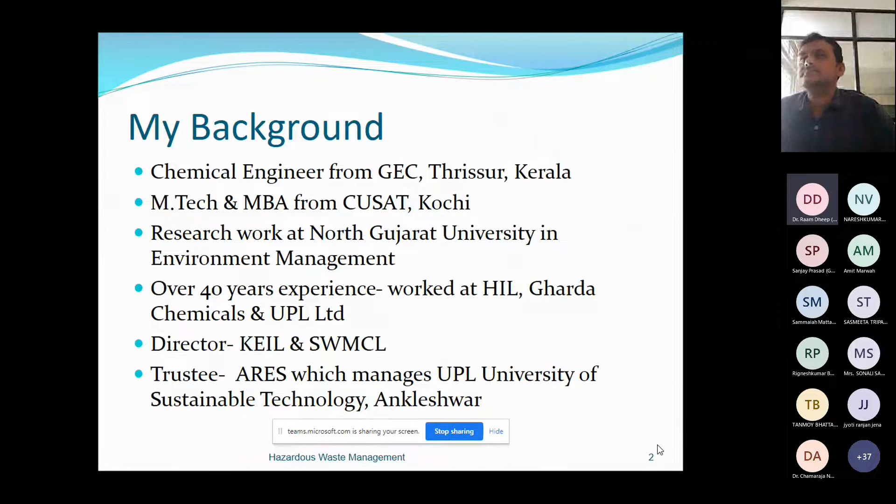I will go to the full slide. So this is already my background explained - I am also a chemical engineer, so very happy to associate with the Indian Institute of Chemical Engineers and this department.

This presentation covers the introduction to the waste management concept, why this is very important, and developments related to the Basel Convention - an international convention. Then the Hazardous and Other Waste Management and Transboundary Movement Rules, 2016, which are the latest amended rules. Then other guidelines and standards for segregation, storage, transportation, treatment and disposal - this is important because we're talking about waste technology. Ultimately, co-processing is utilization, incineration is thermal destruction, and secured landfilling is the final disposal. Last is a case study, and most of the detailed portion will be on the case study.

The European Union has come up with stringent norms for hazardous waste management. The rules are very strict and norms are very difficult to comply with, which is why the focus is shifting to preventing waste generation and utilization. The disposal norms and standards are very, very strict.

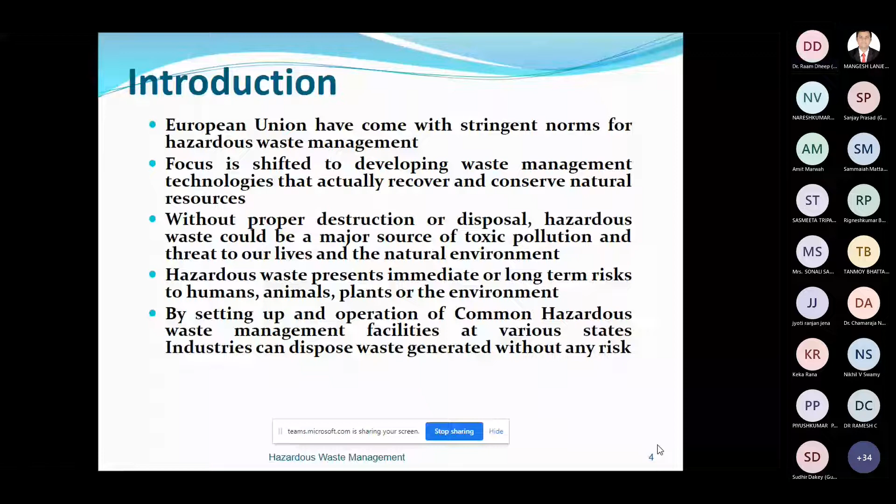Once a site is suspected of having contamination, detailed studies are needed. One of the basic reasons for taking care of proper management of waste is to avoid contamination to the land, water, and air. So once a site is suspected having contamination, you have to do detailed studies.

A contaminated site is a site with a confirmed presence of dangerous substances. Many people say contaminated site, but you need an assessment, and then you have to confirm there is a presence of such dangerous or toxic substances.

The Love Canal incident in USA forced the government to enact CERCLA, or the Superfund Act, in 1980, because in USA it's a major fund, the Superfund, to clean up or remediate contaminated sites. This cleanup or remediation act was enacted in 1980. The European Union also has guidelines for addressing environmental contamination.

There are several sites across the world contaminated because of old practices. Many of them have already been remediated or brought back to original state, or there are a lot of remediation activities going on. This is one of the major activities of environmental professionals today in developed countries, because old practices have given a lot of problems. Today, luckily in India, we don't have that much problem, because our industrialization started very late.

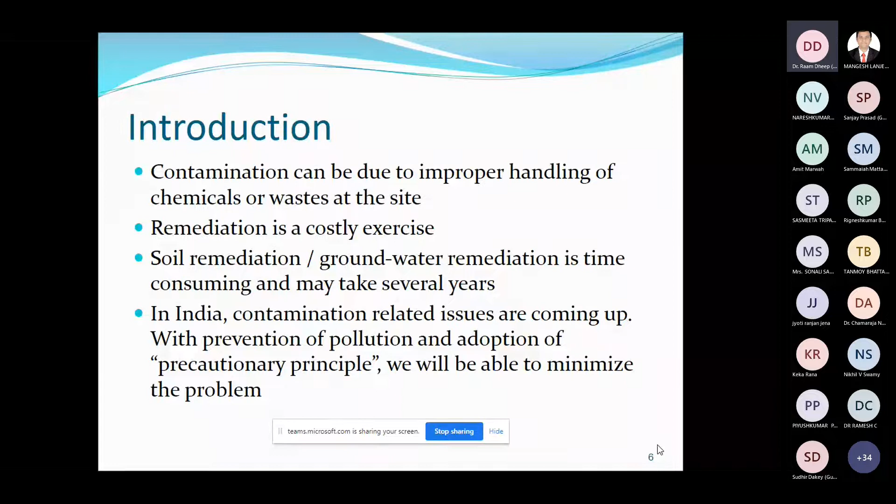Since this is a 2 hour session on the subject, I have taken some examples so that we will come to the subject gradually.

So Superfund, I told you there is a Superfund Act and everything. The Federal Superfund Program, administered by the US Environmental Protection Agency (EPA), is designed to investigate and clean up sites contaminated with hazardous substances.

Sites managed under this program are referred to as Superfund sites. It's a national listing. There are 40,000 federal Superfund sites across the country in USA, and approximately 1,600 of those sites have been listed on the National Priorities List because of the severity of the contamination problem.

So they are included in the National Priorities List, which are being addressed initially. Sites on the NPL are considered the most highly contaminated and undergo longer term remediation, with ongoing cleanup.

So another incident, Koko, Nigeria. There is an incident in 1988. Italian businessmen illegally dumped over 2,000 drums, sacks and containers full of hazardous waste in a small fishing village in southern Nigeria. About 2,000 drums containing hazardous waste were dumped in Nigeria by an Italian businessman.

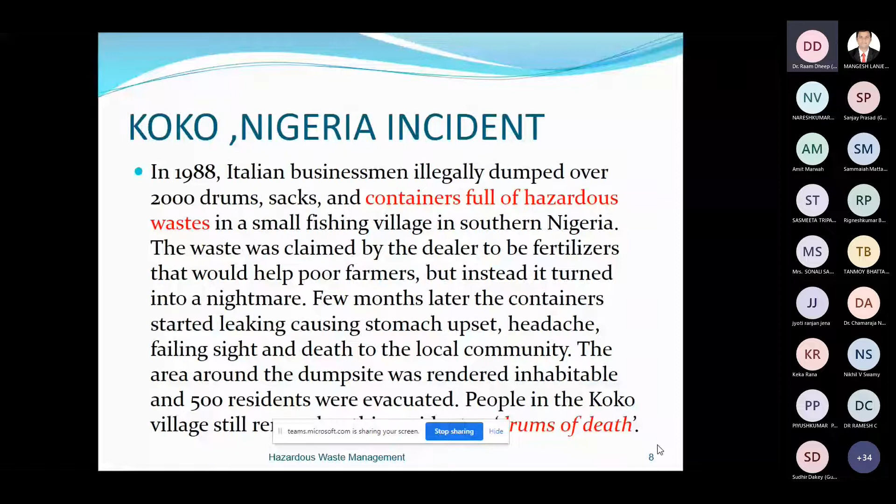Another one, not very old, is the Ivory Coast toxic waste dump. Most of you must have read about this one. This happened around 2006. The 2006 Ivory Coast toxic waste dump was a health crisis in Ivory Coast, in which a ship registered in Panama was involved. Here too, a lot of countries are involved, which is why the Basel Convention came about.

The ship, Probo Koala, chartered by the Singaporean-based oil and commodity shipping company Trafigura Beheer, offloaded toxic waste to an Ivorian waste handling company, which disposed of it at the port of Abidjan.

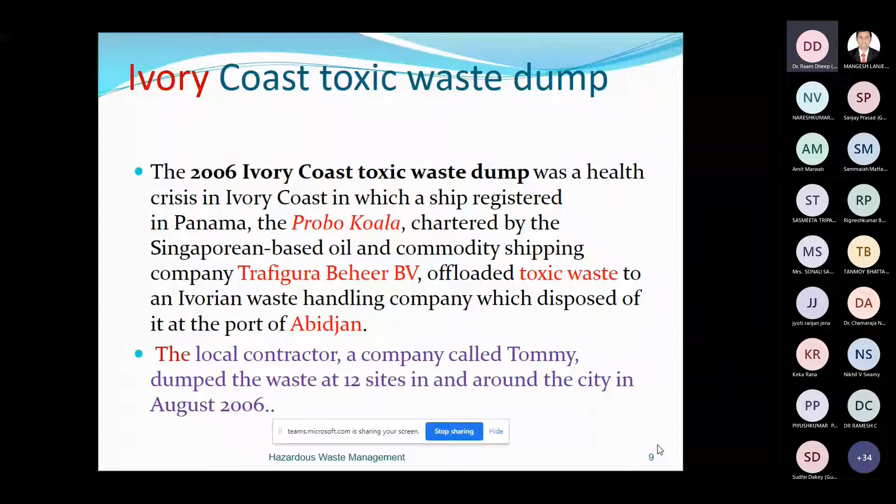In all these activities, several people are involved, especially a local person, local company or local agency who makes a lot of money. The beneficiaries are the generator, the transporter, and the dumper. The local contractor, a company called Tommy, dumped the waste at 12 sites in and around the city in August 2006. He accepted it and managed the material by dumping it everywhere.

The dumping took place against a backdrop of instability in Abidjan, as a result of the country's first civil war. It allegedly led to the death of 17 people directly, and injury to more than 30,000 people. This particular incident got a lot of attention in 2006, because 17 people died and 30,000 people is a very large number of people affected.

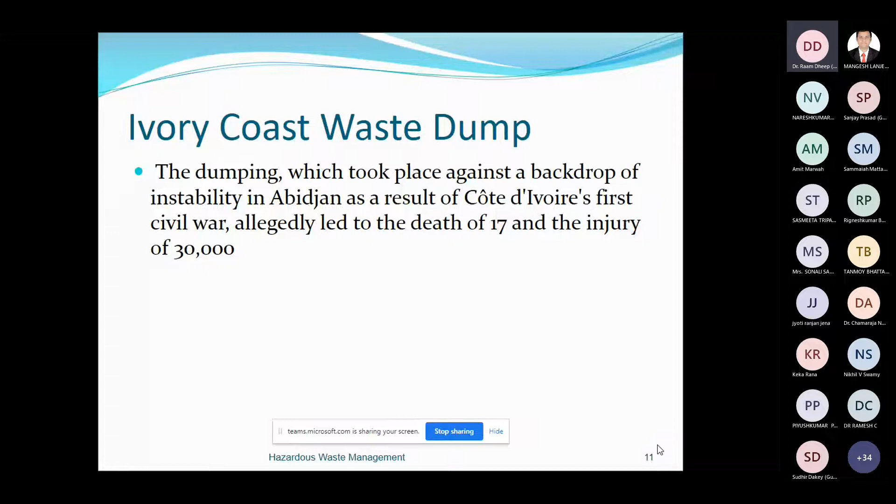Trafigura originally planned to dispose of the slops, which resulted from cleaning the vessel and contained 500 tons of a mixture of fuel, caustic soda, and hydrogen sulfide, at the port of Amsterdam. The company refused to pay the Dutch company Amsterdam Port Services (APS) for disposal after APS raised its charge from 27 euros to 1000 euros per cubic meter.

There was a facility for treating the waste at Amsterdam, and they were ready to treat it. Originally the agreed rate was only 27 euros, but finally when it came to it, Amsterdam Port Services said they wanted 1000 euros per cubic meter. It was a very high increase and the cost was very high.

The Probo Koala was reportedly turned away by several countries before offloading the toxic waste at the port of Abidjan. The ship was traveling with the waste, looking for an opportunity, because it was under the radar. It had already gone and moved around, and finally in Ivory Coast, somebody accepted money and did this wrong thing.

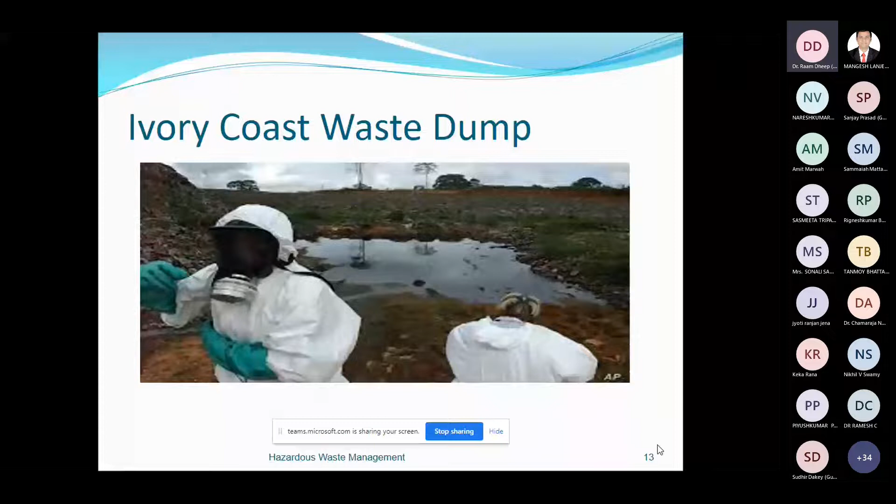Shortly after, it became apparent that the toxic slops from the Probo Koala had led to an outbreak of sickness. People started having problems.

Two executives, Claude Dauphin and Jean-Pierre Valentini, traveled to Abidjan. They were arrested on 18th September, 4 days after their arrival, and were held in Abidjan's prison, charged with breaking the country's laws against poisoning. So these people were arrested.

The head of the Ivorian contractor who dumped more than 500 tons of toxic waste was sentenced to 20 years in prison in November 2008. It took some time to develop. On 13th February 2007, Trafigura agreed to pay the Ivorian government 100 million pounds for the cleanup of the site.

So, cost you see, they have agreed to pay. Then on 16th November 2012, Trafigura and the Dutch authorities agreed for a settlement. So finally, because different countries are involved, Dutch authorities are involved, the Ivorian people are involved, they have come to an agreement.

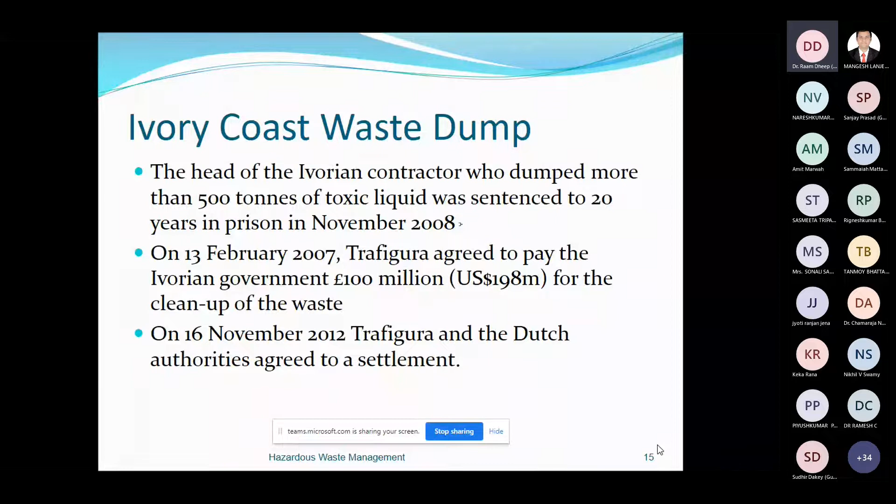The settlement obliges Trafigura to pay the existing 1 million euro fine. And in addition, the company must also pay Dutch authorities a further 300,000 euros in compensation, the money saved by dumping the toxic waste in Abidjan rather than having it properly disposed of in the Netherlands.

So you see, the authorities have taken strict steps, caught the people, fined them, imprisoned them. They also have a heavy penalty, 1 million euro for the cleanup and everything, and I think 3 lakh euros for compensation. So all these are very risky and high. This is a very big lesson. So all this led to the Basel Convention.

One of the incidents which led to the creation of the Basel Convention was the Khian Sea waste disposal incident, in which a ship carrying incinerator ash from the city of Philadelphia in the United States dumped half of its load on a beach in Haiti before being forced away.

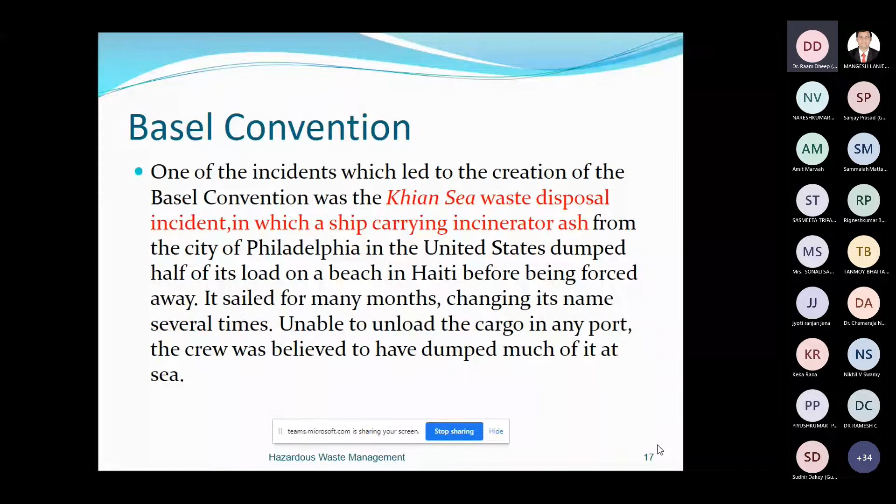It sailed for many months, changing its name several times. Once you are under the radar, you can't escape easily. So just like the nameplates are changed on a car by robbers, they changed its name several times. Unable to unload the cargo in any port, the crew was believed to have dumped much of it at sea. That is one of the lessons from this.

The Basel Convention on the control of transboundary movements of hazardous wastes and their disposal is the most comprehensive global environmental treaty on hazardous and other wastes. It was opened for signature on 22nd March 1989 and entered into force on 5th May 1992.

Because of the issues countries were facing, especially developed countries generating huge quantities of waste, they were dumping rather than treating and disposing, simply sending it to underdeveloped countries. To prevent that transboundary movement from one country to another, the Basel Convention was brought, and it came into force on 5th May 1992.

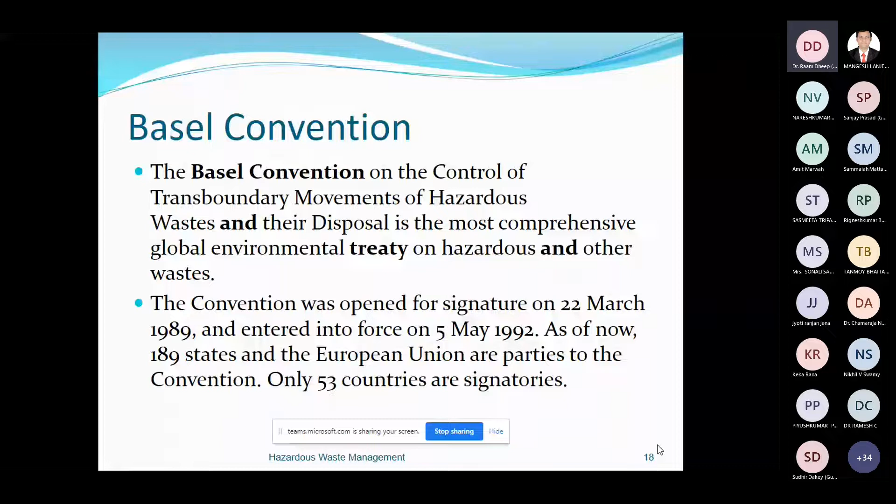As of now, 189 states and the European Union are parties to the convention. Only 53 countries are signatories, and many countries have already implemented it. For our hazardous waste rules, in 1989 we made the first rule, then we adopted the Basel Convention, and we have updated our rules and regulations to match it.

Under the Basel Convention, a waste falls under the scope of the convention if it is within the category of waste listed in Annex 1 of the convention and it exhibits one of the hazardous characteristics. In other words, it must both be listed and possess a characteristic such as being explosive, flammable, toxic, or corrosive.

The other way a waste may fall under the scope of the convention is if it is defined or considered to be a hazardous waste under the laws of either the exporting country, the importing country, or any of the countries of transit. So if by a country's regulation it is a hazardous waste, then it is a hazardous waste. Basel has a lot of provisions; I am not going into the detail.

Now let us come to our regulations, the Indian regulations. All of you know the Environment Protection Act 1986. A lot of discussions are there. You also must have discussed it, because in many seminars and workshops the Bhopal tragedy is discussed. It is in our memory.

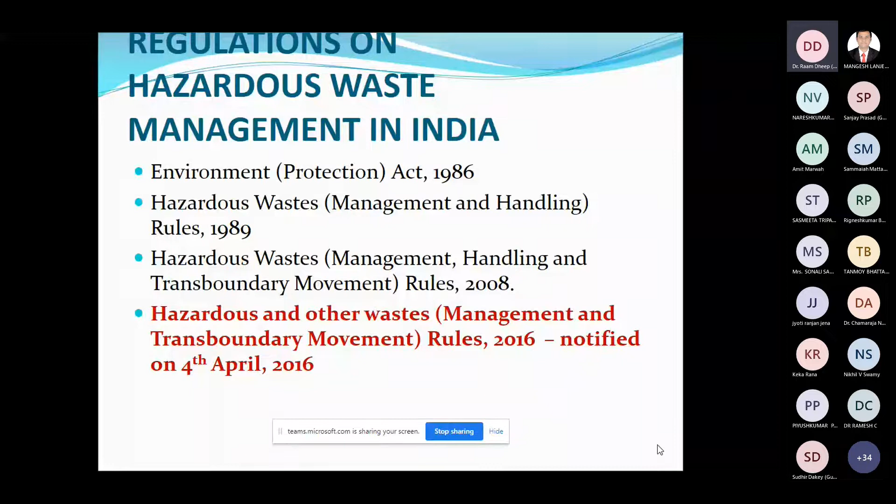Salient features: the rules 2016 shall apply to the management of hazardous and other waste as specified in the schedules of these rules. It shall not apply to wastewater and exhaust gases, operations from ships beyond 5 kilometers, radioactive waste, biomedical waste, domestic waste, because there are separate rules for the other waste handling. So this is exclusion. For biomedical waste there is a separate rule, the biomedical waste rules. So many rules are there.

For example, in 2016, there are 6 rules that have been notified: biomedical waste, hazardous waste rules, municipal solid waste rules, construction and demolition waste, e-waste rules, and plastic waste also. So all 6 waste management rules have been modified and notified. In 2016, a lot of modification and updation has taken place.

The structure of this hazardous waste rule is a total of 6 chapters, 8 schedules and 12 forms. Chapter 1 deals with the applicability and important definitions. Chapter 2 deals with the provisions of waste management with respect to responsibilities of various stakeholders. Chapter 3 deals with the provisions of import and export.

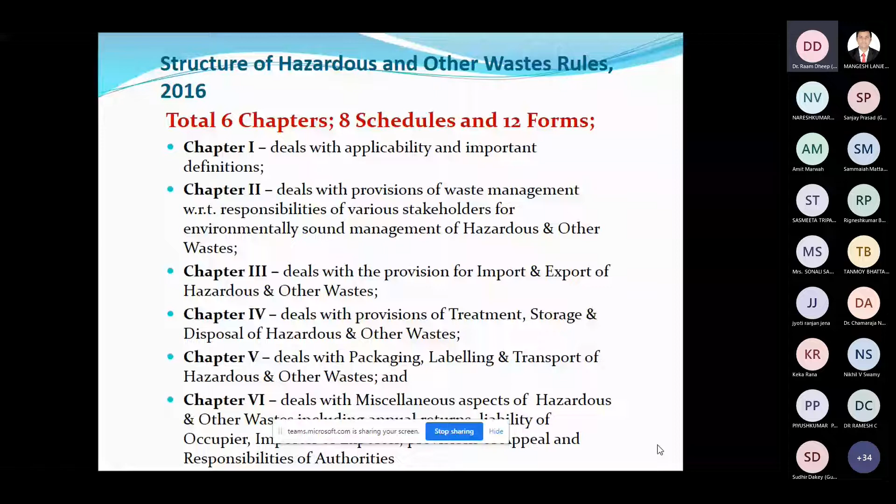Chapter 4 deals with the provisions of treatment, storage and disposal of hazardous and other waste. So here they have given the basic requirements in chapter 4. Chapter 5 deals with the packaging, labeling and transport of hazardous and other waste. Chapter 6 has the different miscellaneous provisions.

Schedule 1 is the list of processes generating hazardous waste. What is happening in schedule 1? They have given 38 processes, each process generating various hazardous waste streams with the category number. I will give an example later from the pharmaceutical sector of the category number and everything.

So each industrial sector has a number, and there may be 5 or 6 categories listed. These are called listed waste. If it is coming, for example, as solvent waste from a pesticide industry, it may have a number like 29.3. Then it is a hazardous waste.

Then schedule 2 is the list of waste constituents with the concentration limits. Schedule 2 covers any waste having some toxic materials concentration exceeding the prescribed limit. For example, if it has hexavalent chromium above, say, 5 milligram per kg or something like that, then it becomes a hazardous waste. So it is based on the concentration, and there is a procedure for that.

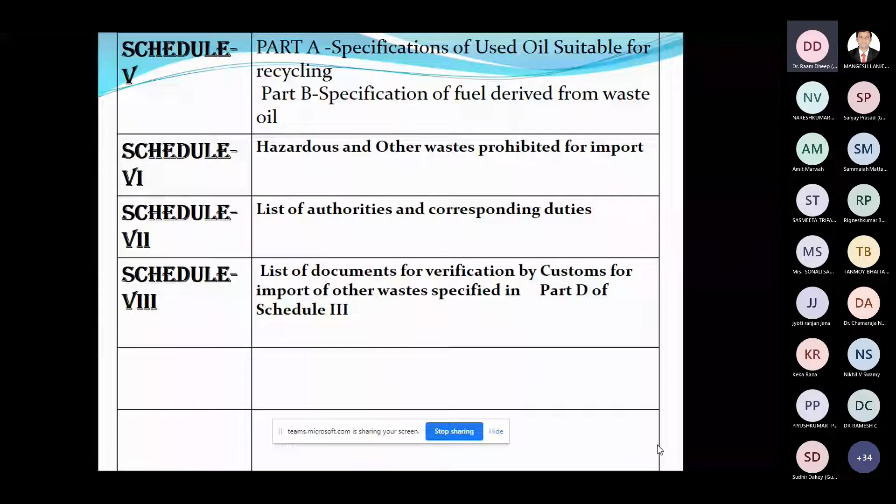Then schedule 6, prohibited materials for import. Then the list of authorities and corresponding duties. Then the list of documents for verification by customs, because import and export is happening. If there are still certain things they are allowing to import, it is for that only. Forms: form number 1 is the application required for grant or renewal of authorization.

So even if you do co-processing or recovery or everything, you need an authorization. So for that, form number 1 is given. Form 2 is the form in which the Pollution Control Board gives authorization. That is form number 2. So they will have to give the details.

Form 3 is a format for maintaining records of hazardous and other waste. There is a format for maintaining how much opening stock is there, how much is generated, how much you treated, and how much you disposed of, and all this needs to come, and what is the closing stock. Form number 4 is the format for annual returns. You have to give the details in form number 4.

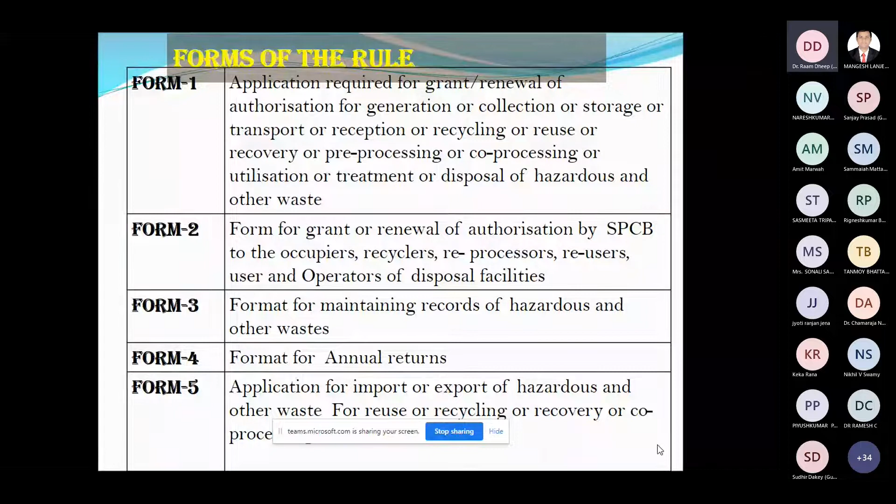Form number 5 is the application for import or export. Certain things are allowed for import or export, and this form is for that particular thing. So I will go through some of the definitions.

So very important, waste means materials that are not products or byproducts. So it is very important. It's not products or byproducts for which the generator has no further use for the purpose of production, transformation, or consumption. So waste is something which is coming ultimately.

Waste includes the materials that may be generated during the extraction of raw materials, the processing of raw materials into intermediates and final products, the consumption of final products, and through other human activities, and excludes residuals recycled or reused at the place of generation. So what is remaining only is the waste as per the waste definition.

Byproduct means a material that is not intended to be produced but gets produced in the production process of the intended product and is used as such. In many manufacturing processes, we use different raw materials and we intend to get an X product, but along with that, you get Y and Z byproducts like HCl, H2S, or many other things. So in the reactions in chemistry, you get something which is not required by us, but it comes along with the chemistry.

So those are byproducts. This is the first time byproduct has been defined in the rule. Earlier it was not there. So this rule has brought it, and definitely this has brought a lot of confusion into the industry and the authority.

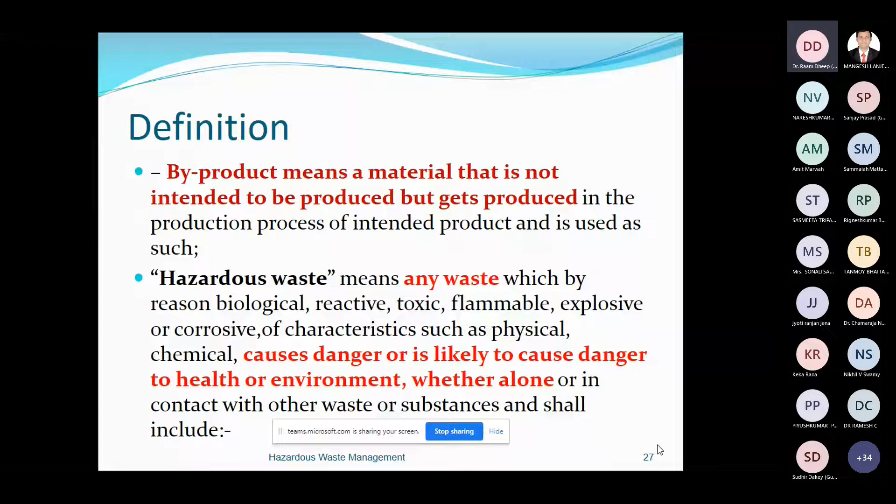Hazardous waste means any waste which by reason of characteristics such as physical, chemical, biological, reactive, toxic, flammable, explosive, or corrosive causes danger or is likely to cause danger to health or environment, whether alone or in contact with other waste or substances, and shall include waste specified in Schedule 1. I told you Schedule 1 has 38 processes. Waste in Schedule 2 with the concentration limits. And then waste specified in Part A, Schedule 3 in respect of import or export. So if it is included, then as per the rule, it is classified as a hazardous waste.

Another important definition is co-processing. Most of you must have heard of it nowadays. It means the use of waste materials in manufacturing processes for the purpose of energy or resource recovery. Both are possible. Energy recovery, resource recovery, and resultant reduction in the use of conventional fuels or raw materials through substitution. So co-processing is practiced by several cement industries, several steel industries. This has attained very big attention in the last decade and is going on in a big way. I will give some examples also.

Other waste means waste specified in Part B and Part D of Schedule 3 for import or export. So it is especially for import or export. It is specifically defined, and it is also generated in India.

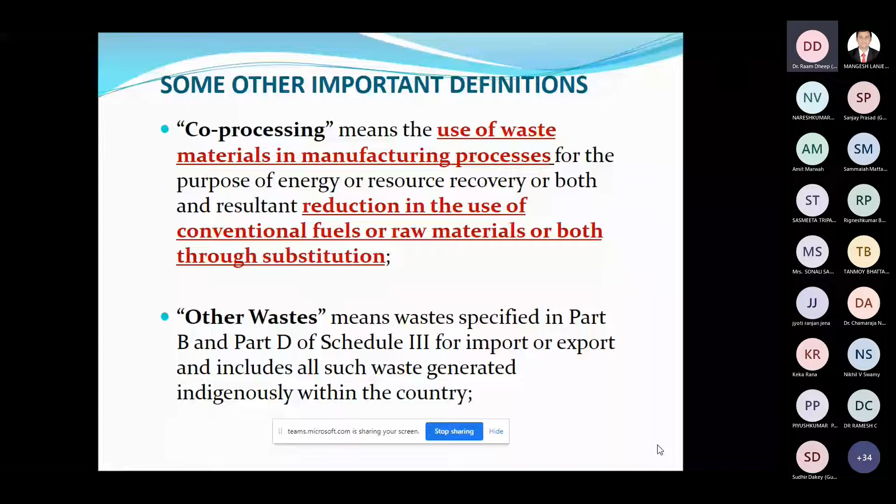So as an example of the categorization as per the rule, if any industry is generating ETP sludge, the category is called 35.3. So this is a listed waste. ETP sludge is a listed waste with category number 35.3. Used oil is 5.1. It can be given to registered recyclers. Drums, contaminated containers and all are 33.1. These can be given for decontamination, detoxification, and to approved scrap processors.

Process distillation residue from a pesticide plant is called 29.1. It is to be incinerated. Like that, there are different categories like batteries A5, asbestos B21, off-specification products from a pharmaceutical company come at 28.4, incineration. Similarly, date-expired or off-specification product from a pesticide plant comes with 29.3. So this gives a very clear-cut category of manufacturing or processing and the waste category. I think about 128 categories are listed there, and this number definitely identifies the material.

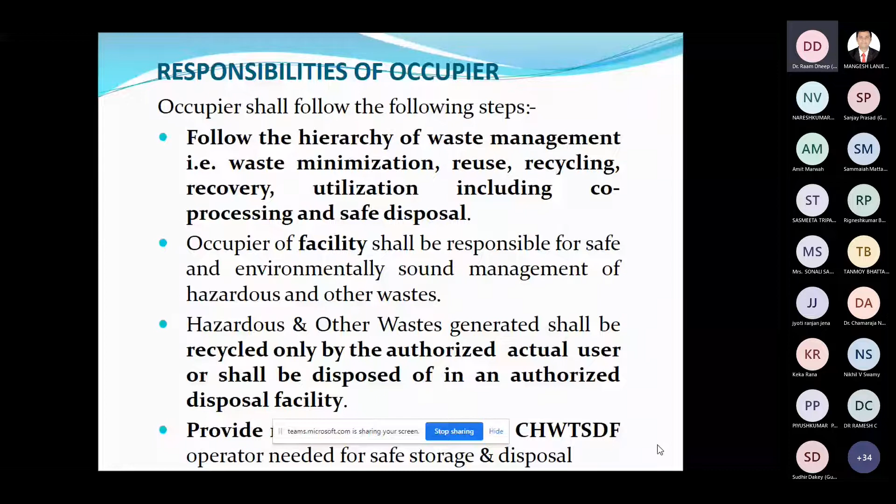Similarly, the Ministry of Environment, Forest and Climate Change is the nodal agency to deal with the transboundary movement of hazardous and other waste. They have to do identification of the waste, grant permission for import and export. They promote environmentally sound management of hazardous and other waste. Also, they sponsor various training programs, awareness programs, and everything is the responsibility of the Ministry of Environment and Forest.

The Central Pollution Control Board is the coordinator of activities of the State Pollution Control Boards. They conduct various capacity building programs, just like this program, for the State Pollution Control Boards and the industry people. And they prepare various standards and specifications.

Even today, I will show the recycling of various process wastes. They have to prepare standard operating procedures, so that many such waste streams can be converted into useful products or can be used. So those are their responsibilities.

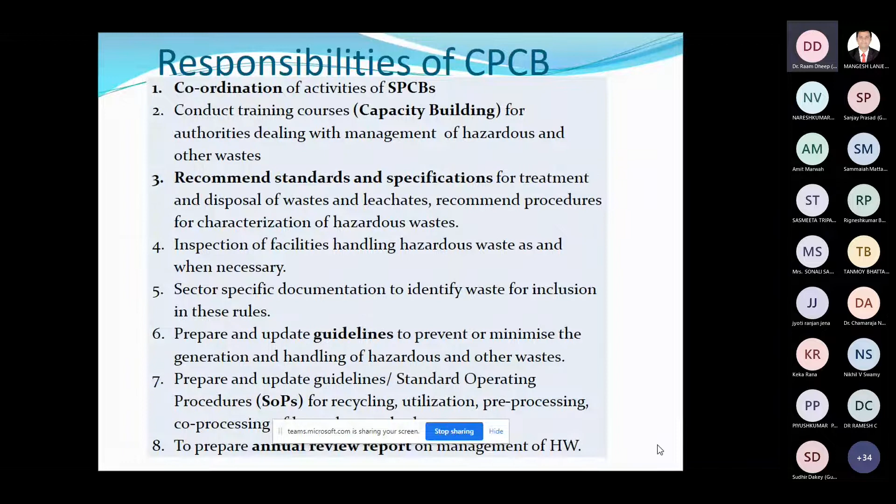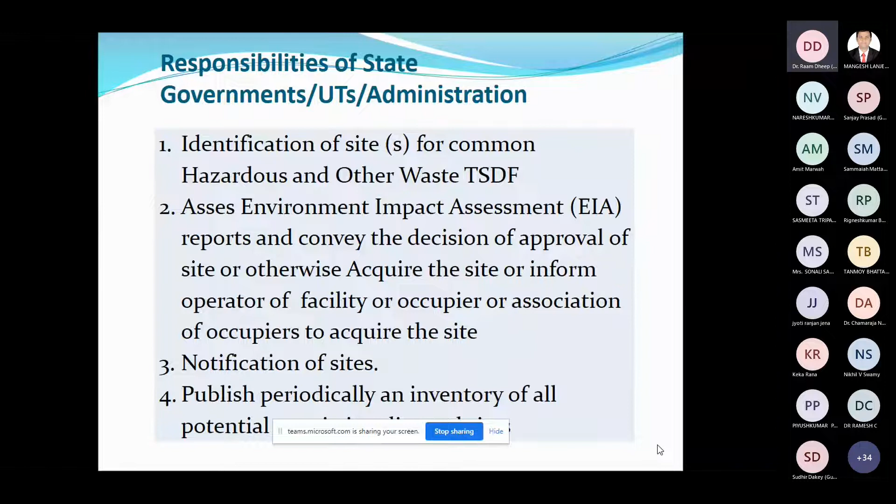The State has to identify the sites and facilitate the EIA, environmental impact assessment. The major responsibility is notification of the sites, and also they have to publish the inventory of hazardous waste generation in the state. The State Pollution Control Board has to do the inventorization, how much is there, and they have the responsibility to grant and renew the authorization. The industries handling hazardous waste in any way need to have an authorization under this rule, and that is given by the State Pollution Control Board.

Then they have to monitor the compliances. Then action has to be taken against the violators. Implementation of programs to prevent, reduce or minimize the generation is also their responsibility. They have a lot to monitor.

The Directorate General of Foreign Trade and Port Authority, because this is applicable basically for the import and export. They have to verify the documents and grant the license required. So all these come there.

If you see, earlier, say 25 years back, our ports like JNPT port had huge quantities, thousands of tons of waste material lying. There were no owners. Somebody imported it and it was lying there, and there were cleanup activities. There was a Supreme Court appointed high power committee looking into this. That is why a lot of focus has been given to prevent import of the material.

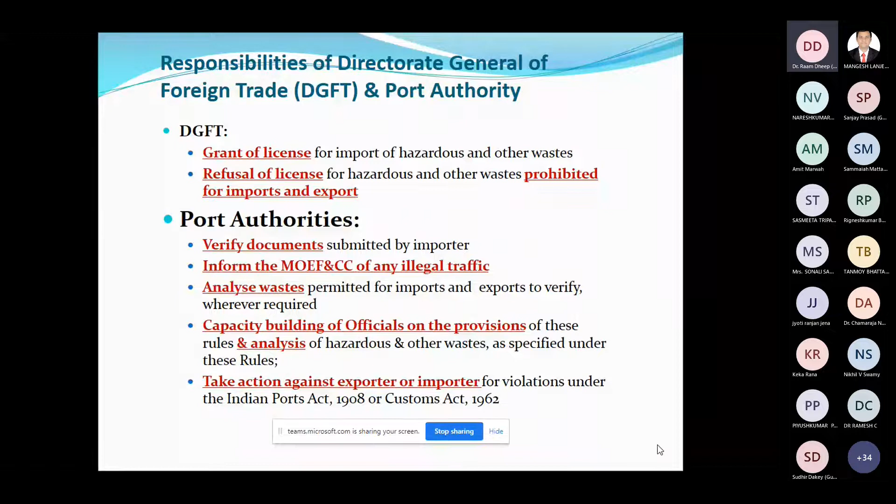Actual users' responsibility is to obtain authorization, then maintain records. If you are utilizing the waste for any purpose, you have to maintain a passbook for the record that is issued by the Pollution Control Board along with the authorization. Maintain records of waste handling: how much you have received, how much you processed, and how much you have sold. And also you have to ensure compliance with the standards.

Importers have to obtain the proper license and follow the proper procedure. Then obtain EPR, extended producer responsibility, which is very important for certain items like electrical items. They have to maintain records in Form 3, obtain authorization, and file an annual return.

So all importers will have to do this. Then there is packaging and labeling in the rule. Any hazardous waste container needs to have proper labeling, so that people take care. It should not be transported along with any food items or edible items. Earlier, such incidents have happened.

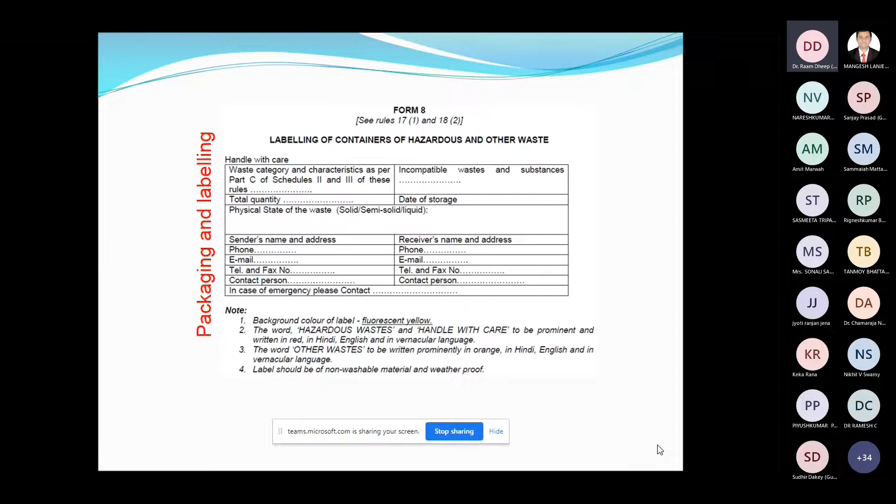So even chemicals you can see in our area, in many of the industrial estates, lying. So people sit on that one, and contamination chances are there. It needs to be taken care of very much. A lot of labeling, identification. Even in the industries, what is happening? Even in the industries there are issues: waste versus raw materials or products without proper labeling.

Another important document is the manifest system. The manifest system is a movement document for hazardous and other waste to be used within the country. The sender of waste shall prepare 7 copies of the manifest in Form number 10, comprising color codes, and the 7 copies shall be signed by the sender. So this is a tracking system.

The sender has to fill this one, and this is helping in the transportation and in tracking the total transportation. And today other requirements have also come. All the transportation vehicles should have a GPS system. Only GPS-mounted vehicles can be used for the transportation. But the manifest system is one thing universally being used.

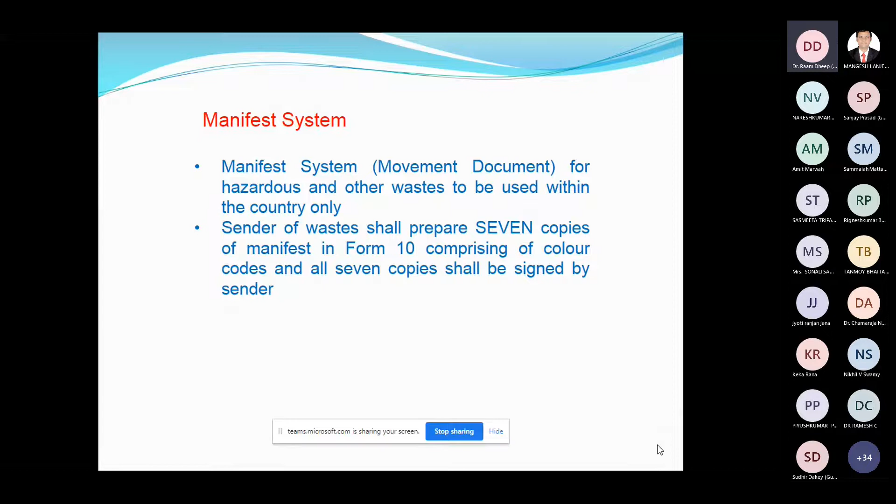So this is the format where people fill in the date, and different color codes are there. All details are there, and this is given to the transporter with his signature, and then it goes to the disposal facility or the receiver, and he receives it, stamps it and returns it. And finally, this copy is sent to the Pollution Control Board.

So these are different colors, and there are 7 copies. The 7th copy is required only for interstate movement. Otherwise, 6 copies are used within the state. The 6 copies are there, and different colors are also there.

So now what has happened? The pollution control boards have started an online manifest system. So a real paper copy is not required. So that is also very easy. Online that facility is there. People fill it up and send it, and tracking is very easy. It can show where the vehicles are, and along with the GPS, it is very useful.

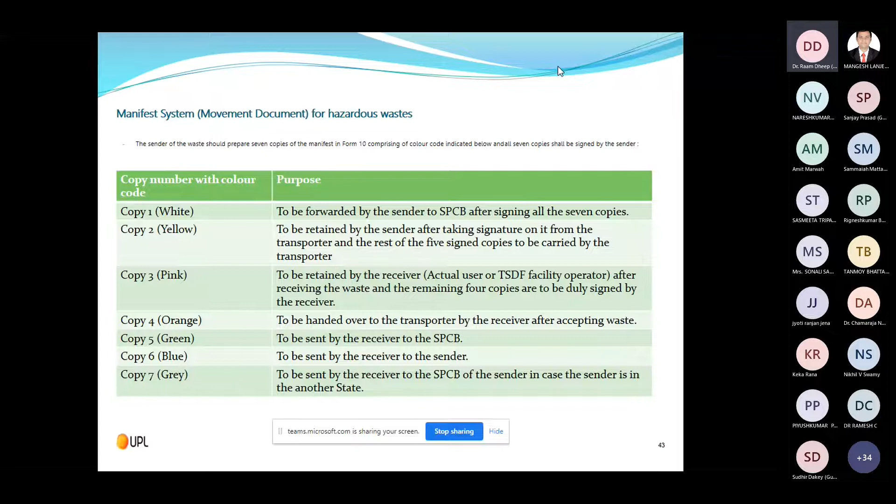So now we will go to another important area, utilization of hazardous waste under Hazardous Waste Rule 9. Utilization, people today say, technologically is an area that needs a lot of expertise and a lot of research work. Academic institutions can also take up such research projects, small projects, so that many waste streams can be converted into useful products you can recover. So rule number 9 is facilitating this.

The utilization of hazardous and other waste as a resource or after pre-processing, either for co-processing or any other use, including within the premises of the generator, if it is not part of the process, shall be carried out only after obtaining authorization from the SPCB. This is only in respect of waste on the basis of standard operating procedures or guidelines provided by the Central Pollution Control Board. So this is very important.

If you have a waste stream and you have found some utilization, then the generator or the people will have to work out and get the SOP, standard operating procedure, for that utilization prepared and submitted to the committees, and they publish this SOP. Only then will the State Pollution Control Board give the permission.

Whereas where standard operating procedures or guidelines are not available for a specific utilization, approval has to be sought from CPCB, which shall grant approval based on trial runs. So then they make the SOP. So if it is a first-time utilization, then a trial run or inspection visit happens, they look at the characteristics, and only then they give the permission.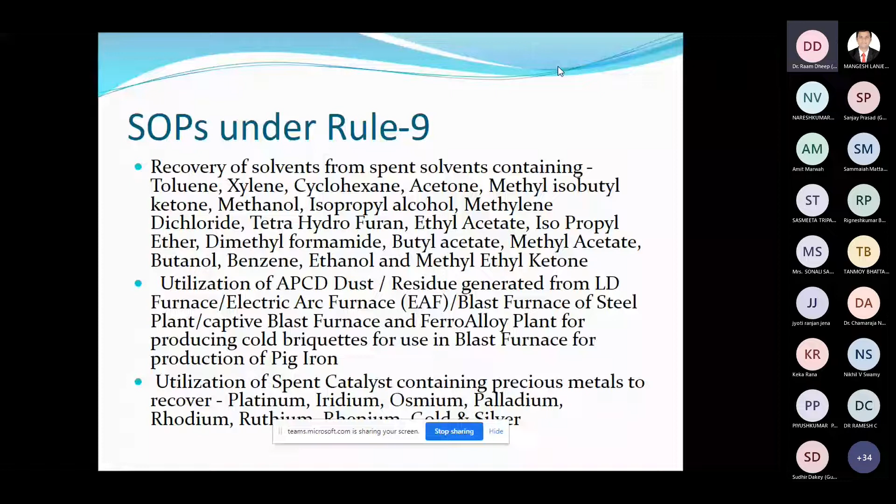Utilization of spent sulfuric acid generated from pickling operations for manufacturing ferrous sulfate. So this spent sulfuric acid from pickling operations, they take up and it can be converted into ferrous sulfate.

Utilization of spent acid containing molybdenum generated from filament industries for producing molybdenum dioxide by heating process. This is a specific process they have given, and they got the SOP.

Utilization of spent HCl generated from steel rolling mills for producing ferric chloride. So this is only for a specific process they have taken, because spent HCl will have some contamination and characteristics. So that SOP is specifically for that particular stream.

So each industry or generator will have to identify the requirement, and then they have to characterize and develop the process for that, and then develop their own SOP and take it up so that it will be approved and it will come as an SOP for that particular stream. If one industry develops it for a particular process, this can be used by other people also.

This is an example of utilization of ETP sludge from pulp and paper industry. It's a hazardous waste otherwise - chemical sludge of ETP, including sludge from secondary clarifier, for energy recovery in atmospheric fluidized bed combustion boiler. So this is a fuel replacement. Some sludge from ETP of a paper industry has calorific value.

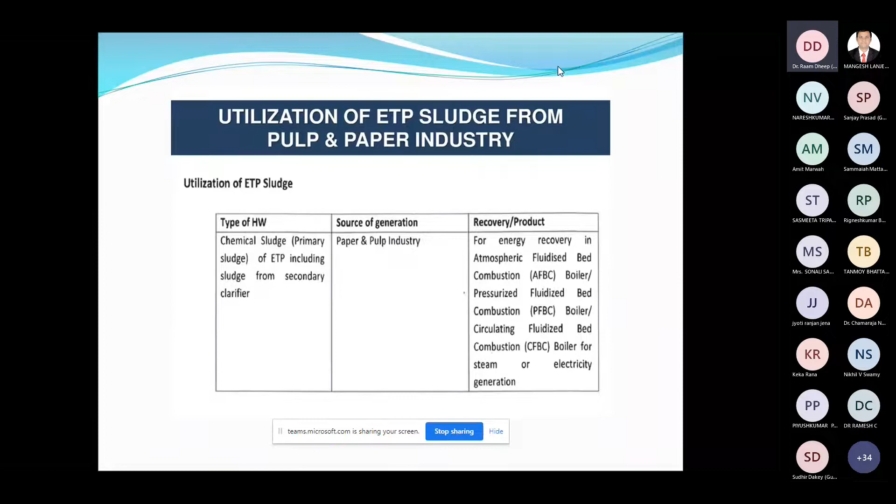So you dry it and use it as fuel. So there is an SOP already there for that particular pulp and paper industry. Similarly, there are 53 SOPs already published by Central Pollution Control Board. You can go through the CPCB website and understand. This case is one of the resource recovery options.

There is another SOP by CPCB for drum decontamination and reuse, because a large number of containers are generated in chemical industries and other industries. So there is an SOP for waste chemical, oil and lubricant drums or barrels - how to decontaminate, detoxify, and reuse them. If you follow that, authorization can be obtained, and people are already practicing this.

So that is on rule number 9. So for the implementation part, if you see, it is a very complex problem. It is not like wastewater treatment or air pollution. This hazardous waste is more complex, because different chemicals are involved. We don't know the characteristics in many ways, and so the technologies required are very complex.

And once you do something, you generate, you may change the waste form. For example, if you treat or incinerate, you generate ash, which is hazardous waste again, and you generate air pollution. So that air pollution you again scrub with caustic or other media, then you generate a scrub solution. That scrub solution you again treat with lime and others, you generate a solid waste. So it is a vicious circle. The problem is not solved everywhere, but by doing this step by step, the toxicity is reduced, hazardous nature is reduced, and the volume is reduced.

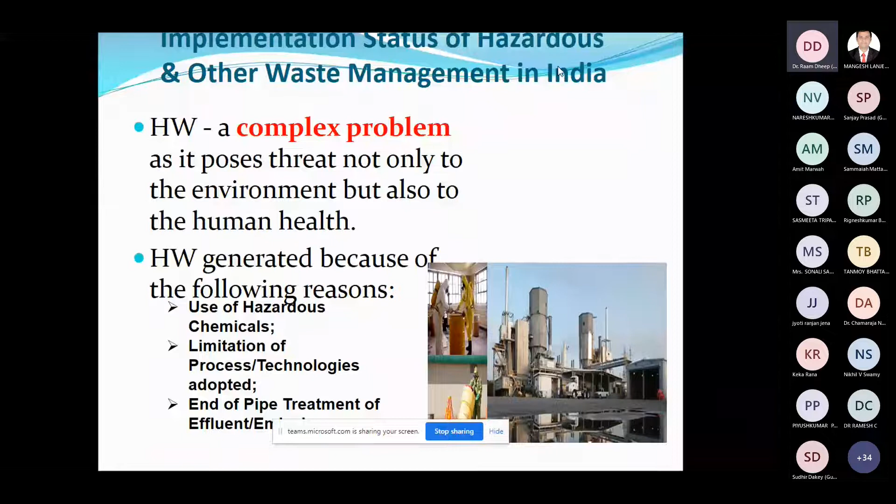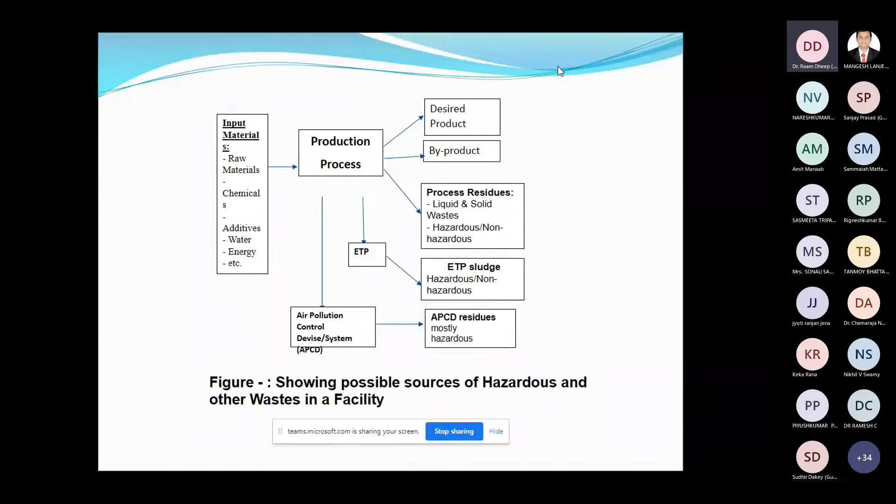So that is why waste management is very important. Different options are to be used, and different activities will have to be done. With your chemical industrial or chemical engineering background, you know the sources of generation from raw materials, solvents, and various additives to the chemical manufacturing process. You get the product, the byproducts, then different waste streams - solid waste or filtration residues. Effluent goes to the ETP, treated residues, air pollution control system - you get waste like that from different sources. You all know, so not going into detail.

Hazardous waste generation in India, as per CPCB, is about 7.2 million TPA, that is 72 lakh tons in a year. It is generated by about 60,000 industries. It is about 2 years old data, so I had taken it earlier from their site. It contains about 44% that is landfillable. So most of the inorganic waste can go to the landfill, as it is landfillable.

47% is recyclable, that is important. A lot of materials like gypsum and many other things are recyclable. Another 8.5% is incinerable, luckily small quantity, but 0.65, about 6.5 lakh ton, is a very huge quantity of incinerable waste.

About 83% of total hazardous waste is generated from 7 states: Gujarat, Maharashtra, Tamil Nadu, Andhra, West Bengal, and Chhattisgarh. So industrialized states, especially chemical industries and other metal processing industries, generate a lot of hazardous waste.

If you see the scenario today, I have seen the latest position. There are 29 common secured landfill facilities in the country, in 16 states, and there are 14 common incinerators. But some facilities have both landfill and common incinerator.

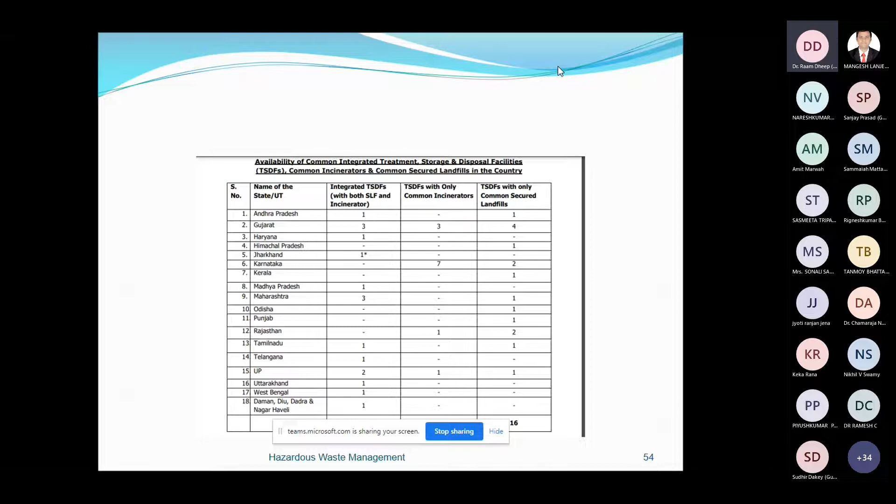And for hazardous waste, the basic important thing is the characteristics, which is very important. Ignitability: flash point less than 60 degrees, it can catch fire. Corrosivity: you know that pH less than 2 or above 12.5 attacks the metallic parts. Corrosivity is a big problem; if you keep it in containers, some of the things get corroded and come out.

Reactivity is another thing, a very dangerous property. Substances that are unstable under normal conditions can cause explosion, produce toxic fumes or vapors. For example, acid and alkali, if you mix them, there is a big reactivity. Similarly cyanide, sulfide, batteries - there are a lot of things which react together if mixed, and it gives a problem. So for people handling hazardous waste in common facilities, our headache is reactivity. It's very, very difficult to find out the reactivity, and it's a big problem.

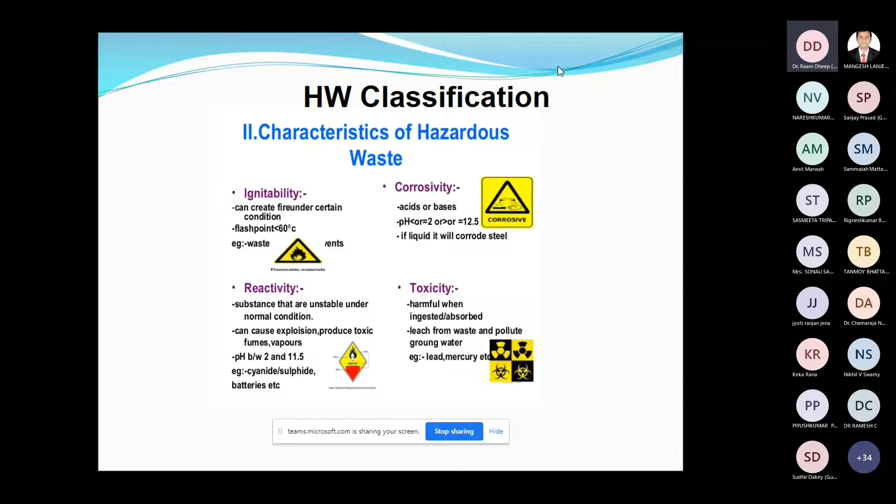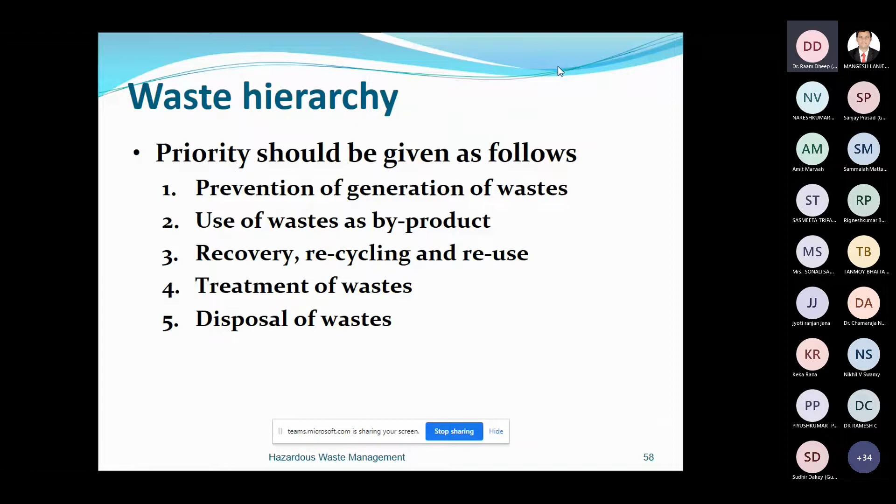Other activities like recycling, energy recovery is another thing - everyone is interested in energy now. So this is all important, but disposal is the last option, and the disposal quantity should be very minimum, after treatment and everything. And if possible, we should avoid it.

Waste minimization: process control, sound engineering practices, quality control, converting waste to useful products, reuse, recovery, process route change - all these are in our plan that people are practicing, and we are making very competitive products. So it's very important that a lot of R&D work and improvements are required in all of this.

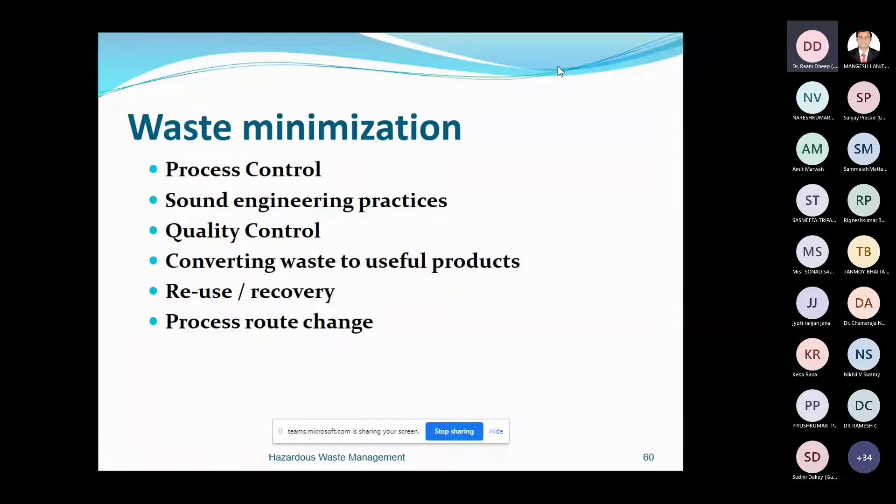Byproducts and waste are very important, and I told you that a lot of byproducts are generated in the process - HCl, ammonia, and everything. Converting them into saleable products is very important. Today, as per the 2016 rules, byproducts are to be included in the environmental clearance.

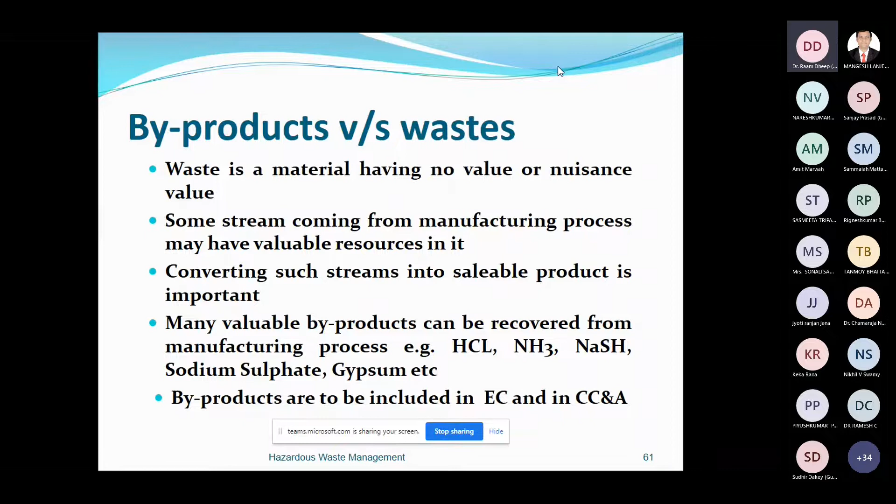You have to get the environmental clearance wherever applicable, and include that in your consent and authorization. Otherwise, they may consider it as hazardous waste and may not allow you to give it away. So this is one of the things - byproduct versus hazardous waste.

There is a guideline prepared very recently, in April I think, a framework on identification of materials generated from industrial processes as waste or byproducts. So there is a framework prepared which helps you identify this. It's a little difficult to understand, but I'll tell you. I don't know if it's readable, but you can refer to the CPCB website to get this.

So here, if the waste is listed in Schedule 1, the arrow goes to the material being listed in the hazardous or other waste column, and you have to handle it properly. Otherwise, if you have some usage, the generator needs to conduct a pre-feasibility study and make an application to the concerned State Pollution Control Board. Then they examine the application and put it to the technical expert committee for appraisal, examining the feasibility and looking at every aspect, and they give a TOR.

Then there's recommendation by the technical expert committee, and the SPCB decides on feasibility based on the committee's recommendation. If found feasible, they give the TOR. Then preparation and submission of the environmental impact and risk assessment study reports and safety data sheets by the generator to the SPCB. Their appraisal and recommendation is made by the technical committee, then final decision by the Pollution Control Board based on the recommendation. If the claim is accepted, it is made a byproduct.

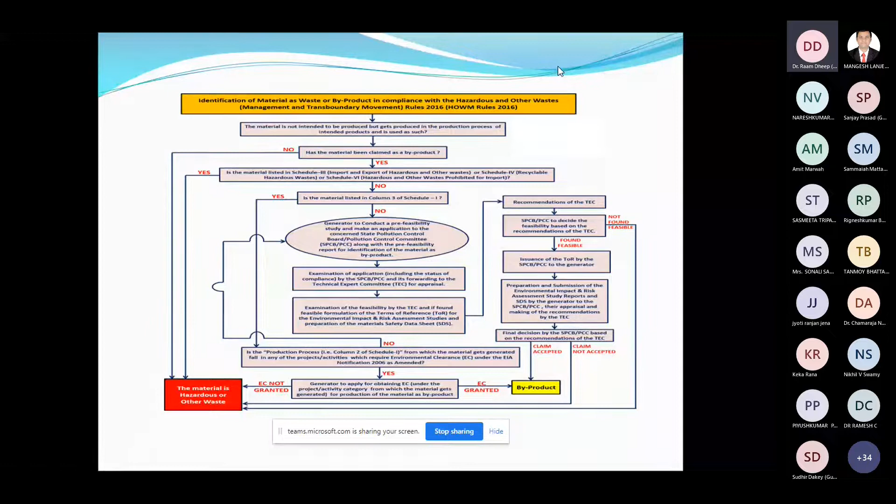So there is a procedure, a framework, and committees are there for this. You can utilize this, and there's a lot of scope for academic institutions and consultants to work on this. Industry is already making use of it.

So, hazardous waste management strategy - I have only 20 minutes now, so I have to speed up. There are different wastes I've talked about. The treatment options: for inorganic waste, secured landfilling; for example, acidic waste needs neutralization, waste with heavy metal needs stabilization; organic waste treatment includes solvent recovery, usage as fuel in cement kilns, and incineration - thermal degradation. These are the methodologies.

Secured landfill is an engineered, designed facility for landfilling. It can be captive or common. It is only a storage - land is getting utilized in this. But while designing, you have to take care that the land is not contaminated, soil is not contaminated, and there's no issue or leakage of any kind, so that the waste is isolated from the environment.

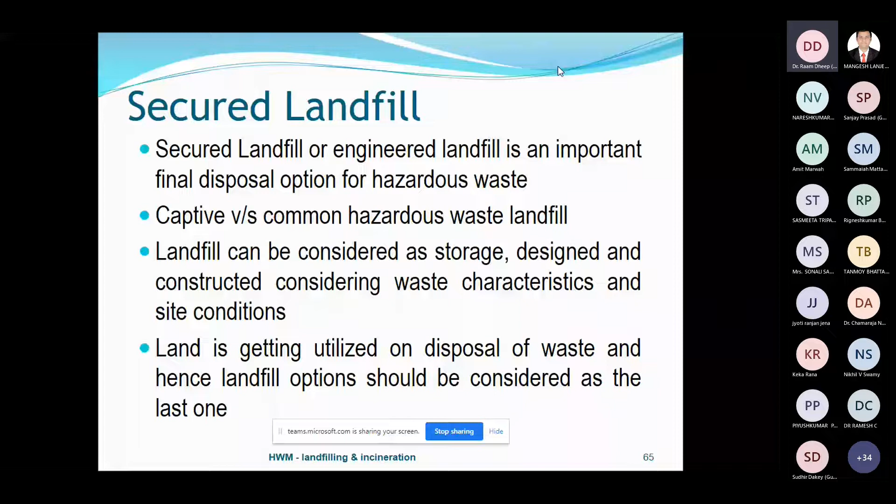For that, a liner is required to contain the toxic leachate within the landfill and prevent contamination of land. So this is the liner system - various liner systems exist. This is the construction detail. Composite liners are there - this liner system includes clay liner, HDPE liner, and everything.

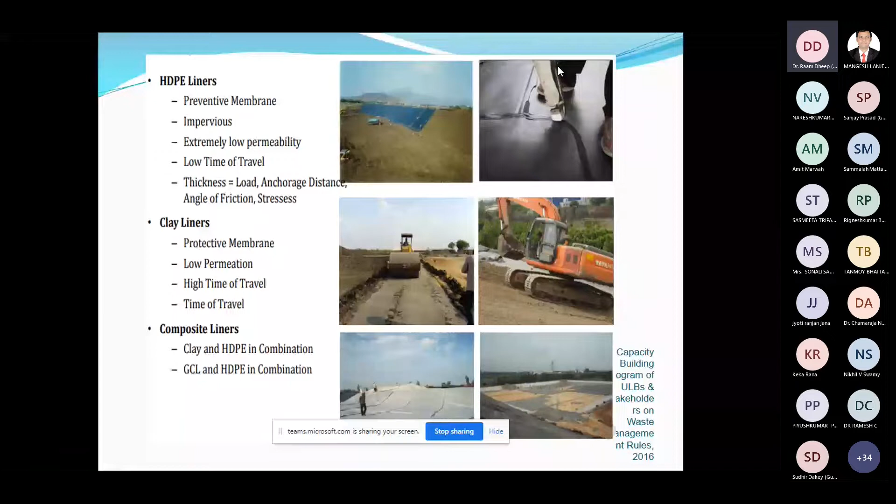This is the construction of the landfill using multiple liner systems. So this is an example - top coverage after filling up, and at the bottom there are clay liners, HDPE liners, and so on. Then again at the top, finally it becomes like a box, with the material inside - nothing can go inside and nothing can go out. There will be a leachate collection system to take out the leachate, and similarly gas vents will be provided for venting. Otherwise no rainwater or anything will enter once you cap it totally - it becomes fully encapsulated.

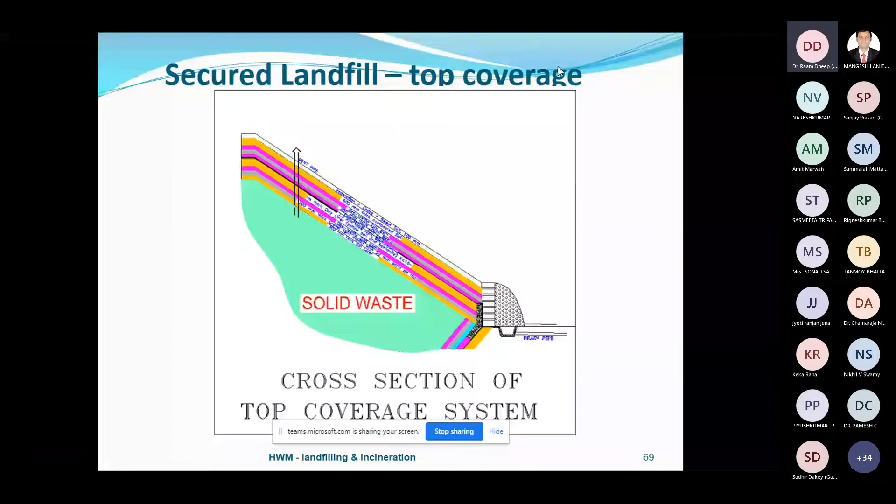Design criteria: leachate management is very important. Leachate is generated on account of infiltration of water in landfills. Significant quantity of leachate is generated during the active phase of the landfill, because there is an active phase, then a closed phase. Later, after the capping, you have to maintain the site for 30 years. Leachate quantity will reduce after coverage. Proper leachate drainage, collection, removal, and treatment system should be incorporated.

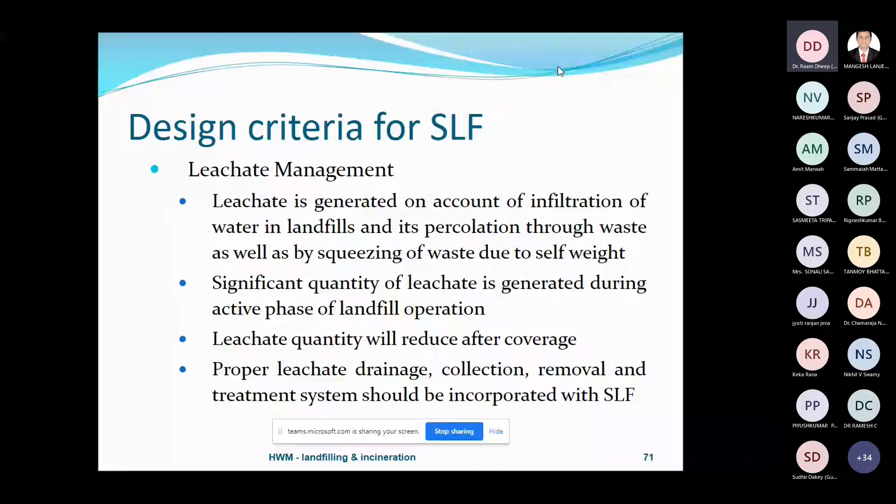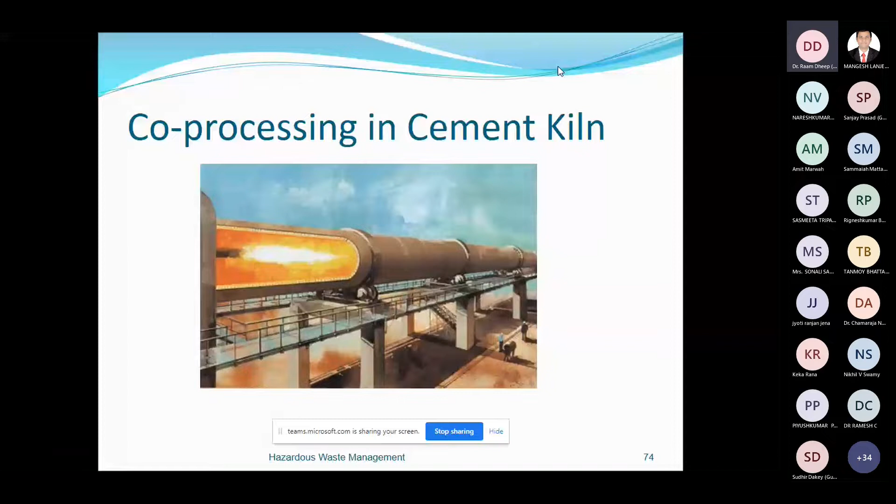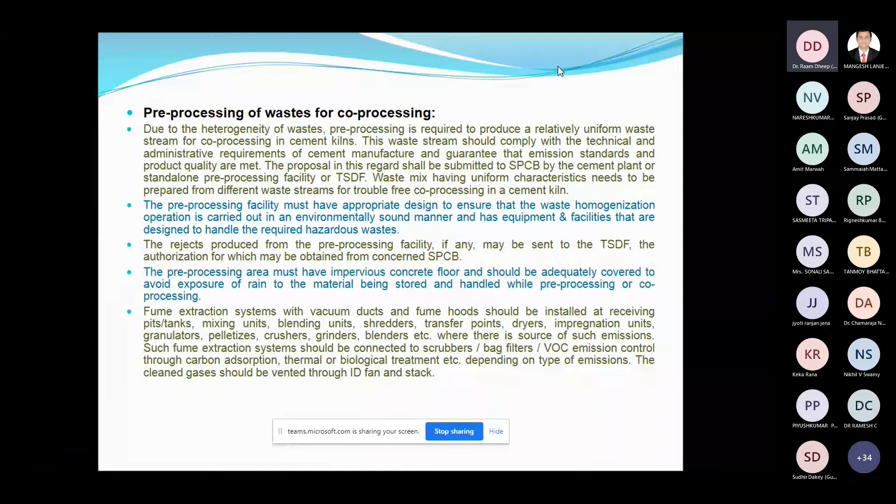temperature, turbulence, and alkaline media. Lime is there, limestone is there in that one. So all these factors are there. There is a temperature above 1400 degrees centigrade, high residence time. All these are favorable factors. There is a guideline for co-processing also published by the Central Pollution Control Board, for various materials. So pre-processing is there. All waste cannot go directly to co-processing. You need to have some blending, mixing, and bring it to some quality. This guideline gives that information.

Emission standards for cement kilns also have been published, because if you use hazardous waste for co-processing, you have to take care of the emissions. Like particulate matter should be less than 30 for new plants. All these are given, even including components like dioxins and furans at 0.1 nanogram TEQ per normal meter cube. So there are specifications given for cement plants also when you use hazardous waste.

Now another treatment technology is incineration, which all of you may be knowing. Incineration is the second oldest method for the disposal of waste, the oldest being landfill. Incineration is a process of fast exothermic oxidation. Incineration is the combustion of waste in a controlled way. It is not open burning. It is in order to destroy the waste or transform it into less hazardous, less bulky, or more controllable constituents. See, all these words are very important. When you do incineration, you get ash, a very small quantity. Incineration can provide safe, efficient, economic, and reliable disposal.

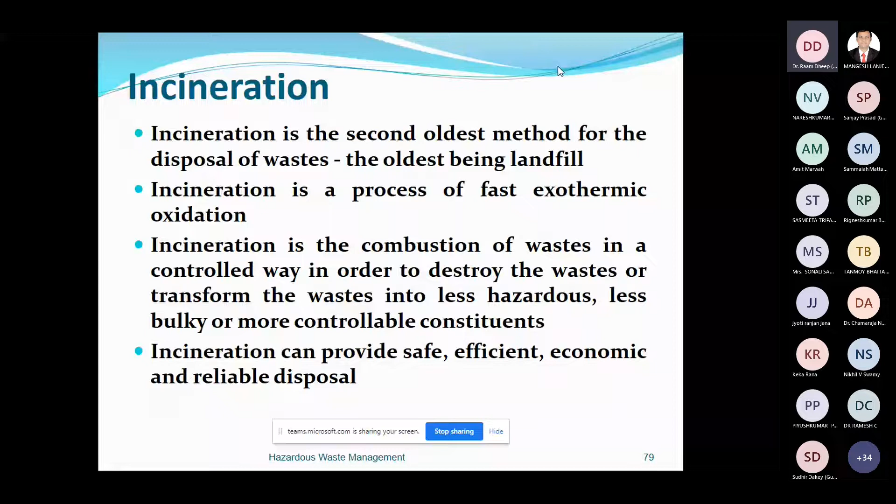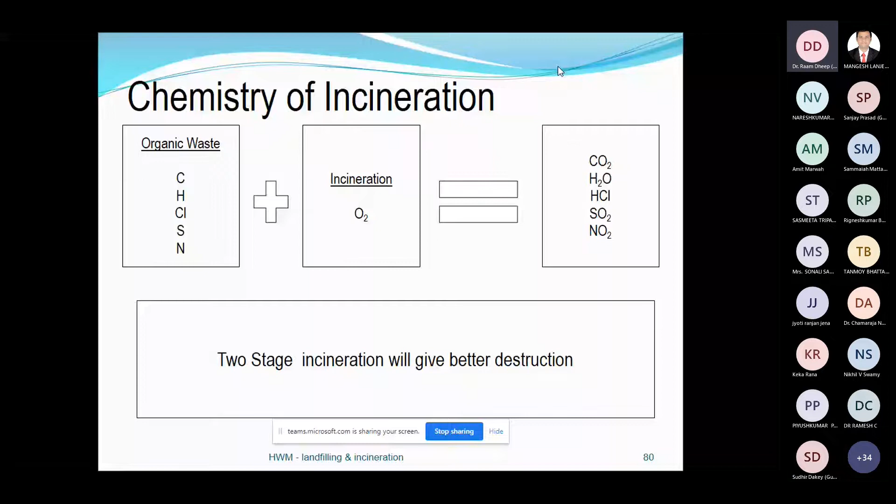This is the chemistry. You see oxidation, and it gives CO2, water, HCl, SO2, NO2. Two-stage incineration will give better destruction. Today, everything is a two-stage facility. So a waste that contains organic matter can be incinerated. Waste heat recovery and power generation must always be considered secondary to the prime job of the incinerator, waste disposal. So all these are very important in incineration. There are three basic things, the three T's: time, temperature, and turbulence.

Residence time in the post-combustion chamber, the second chamber: residence time of gas must be at least 2 seconds from the point of last injection of combustion air. Temperature is above 1100 degrees centigrade, with 2 seconds gas residence time, and there should be complete turbulence. So these three factors are important. Rotary kilns are generally favored for incineration compared to many others. The time, temperature, and turbulence.

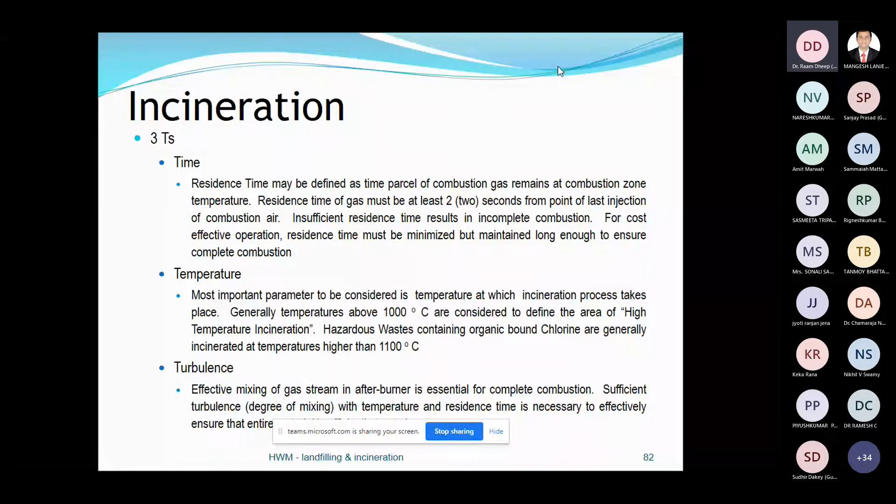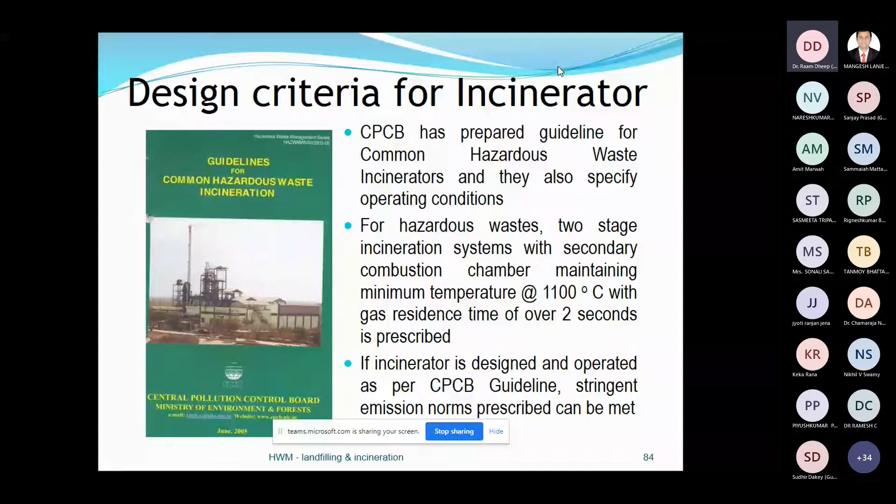Design consideration: types of waste characteristics you should know, solid, liquid, and everything, heating value, thermal load, and what is the actual throughput. Design criteria are published by the Central Pollution Control Board, and the guidelines are there. Emission standards are there. For example, they go for very stringent limits: particulate matter should be less than 50, HCl less than 50. Dioxins and furans also they have given 0.1 nanogram. All heavy metals are also there.

Characteristics of waste I have already discussed: corrosivity, ignitability, reactivity, and toxicity. This is one photograph I have added. There is an incinerator pilot plant at Karlsruhe Research Institute in Germany. I had an opportunity to visit there in May 2007. It's a very big plant, not a small plant. I think it has the capacity to incinerate something like 500 kgs per hour, with all infrastructure. And this is installed basically to study dioxin formation, dioxin chemistry.

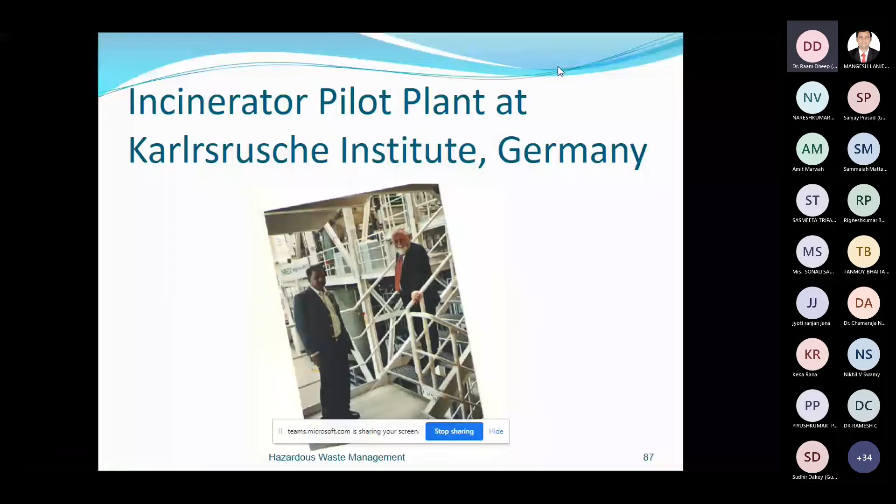I spent one day there and understood, and my friend Dr. Velo explained it to me. He has published, and this team came to Ankaleshwar or Bharuch in 2006 for ChemCon, and they presented a paper also. Dr. Velo presented their studies, and subsequently in 2007 I visited this plant and understood the dioxin chemistry and everything. There are storage guidelines and everything. I will not go into this one.

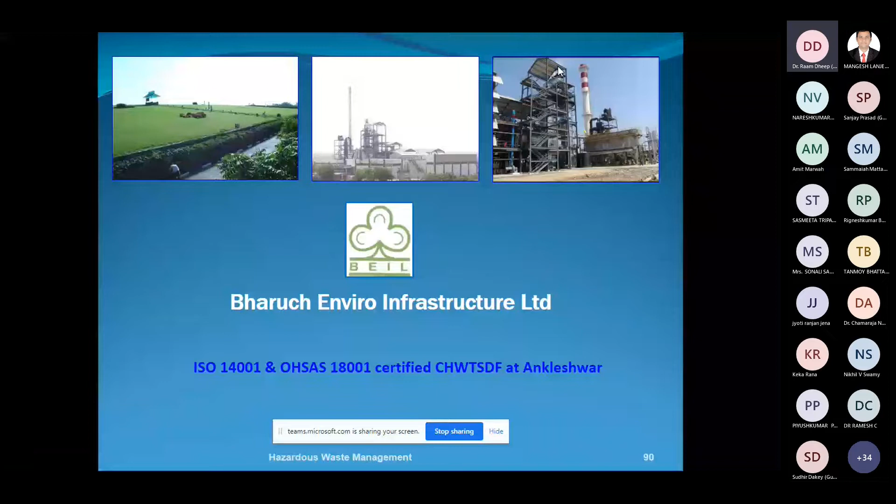Now I think we get 10 minutes for the case study. We will go to the case study of BEIL. Three aspects are there: landfill, incinerator, another incinerator. It is already ISO 14001 and OHSAS 18001 certified, considered to be one of the best facilities in India. So far 38 lakh metric tons of hazardous waste have been disposed in landfill and more than 2.8 lakh incinerated during the last 15 years. All the studies have been supported by Professor Manoj Datta, IIT Delhi. Now he is retired and he is supporting design and construction of the landfill.

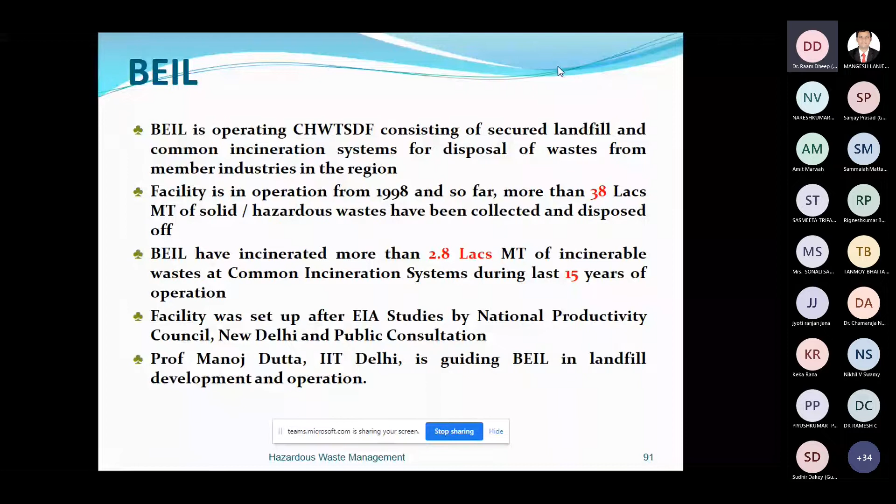Similarly for the incineration facility, BEIL has a tie-up. German experts are guiding; they are visiting and helping. We need support from experts so that the facility can meet standards and improve. You set up in a small way, but then you grow and incorporate these things. We have done a lot of modifications. The incinerator was installed without the heat recovery system, then we installed heat recovery. Now both incinerators have heat recovery systems, and we are utilizing the steam generated in the multiple effect evaporator. Total plot area is 69 acres.

A manifest system is used. All the groundwater monitoring is there. Leachate collection wells are provided. Leachate is treated at the multiple effect evaporator, which is very important. Earlier it was treated in the common effluent treatment plant, but because of its characteristics it was very difficult. So we are evaporating, and the salt is disposed in the landfill. Industrial waste: these are the categories of who is giving the waste. Drugs and pharma 94, dyes and intermediates 144, pesticides 44, organic industries 146. This is the split-up.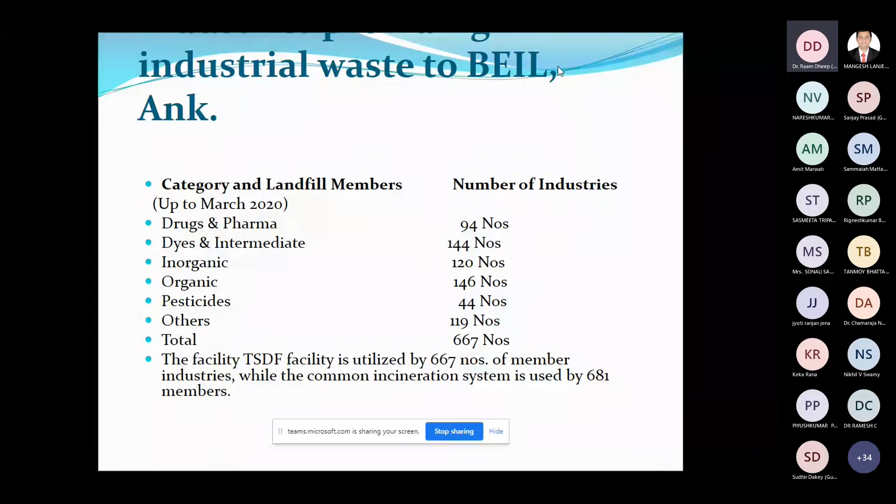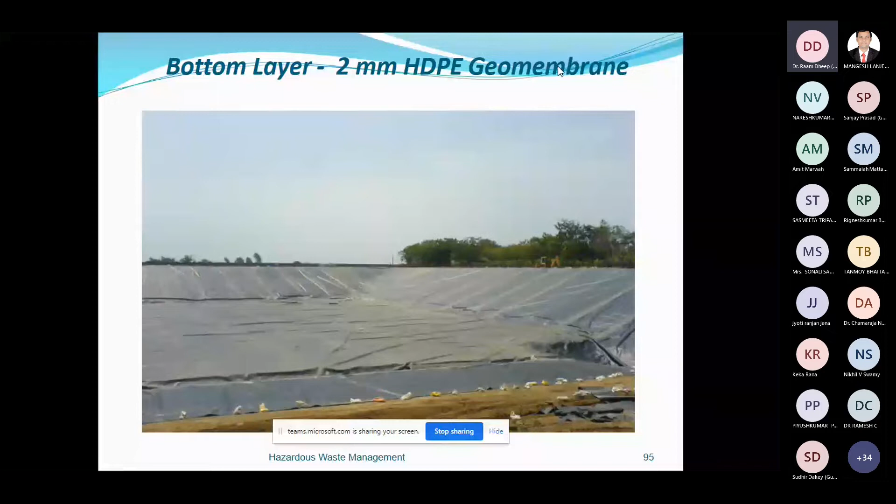This is the construction of the below-ground landfill. The water table is about 29 meters below ground. You excavate and make the clay liner blended with bentonite so that you get a permeability of 10 to the power of -7 centimeters per second. Then you provide the HDPE liner. This is also very important. We get imported liners, 2 mm thick HDPE liners are provided, welded together, and the welding joints are vacuum tested and pressure tested to prevent any leakage.

Then we provide the geotextiles and concrete pitching on the sides so that it's not damaged. Side liners are also provided so that there is no percolation of leachate or solid waste into the soil. Then the waste is disposed using hydraulic dumpers, and you compact it with bulldozers. After that, you provide various liners and the final cover so that there is no escape of material. And you can see the vent also.

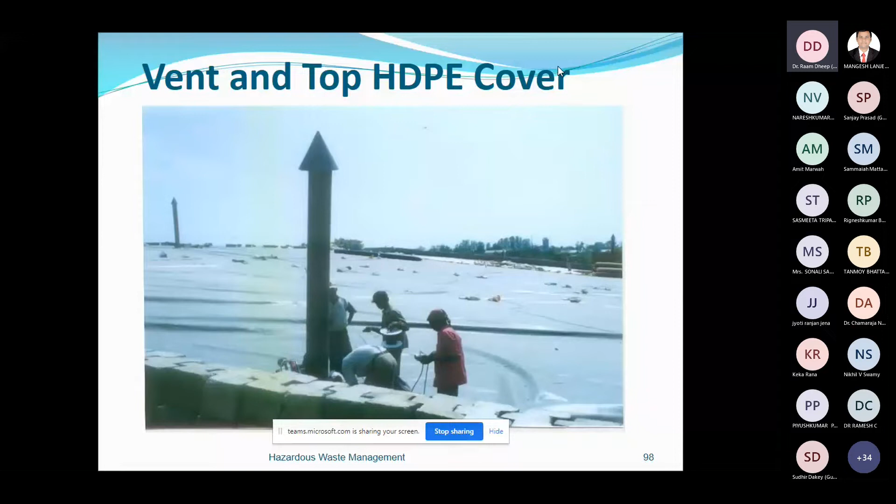Vents are provided as a precaution so that if there is any gas generation, it can come out. Then this is the drainage layer, so any rainwater should go out. So this is there. Then you give a vegetative coverage. This is top soil. Then you have this one.

So nowadays, to reduce the erosion, we are giving pitching at the top, and you can see small plants there. That is Jatropha biodiesel plants that are planted, and we are utilizing this area. Monsoon is a threat, and we give the operating area complete temporary coverage so that water entry is prevented, and you maintain that for about 4 to 5 months.

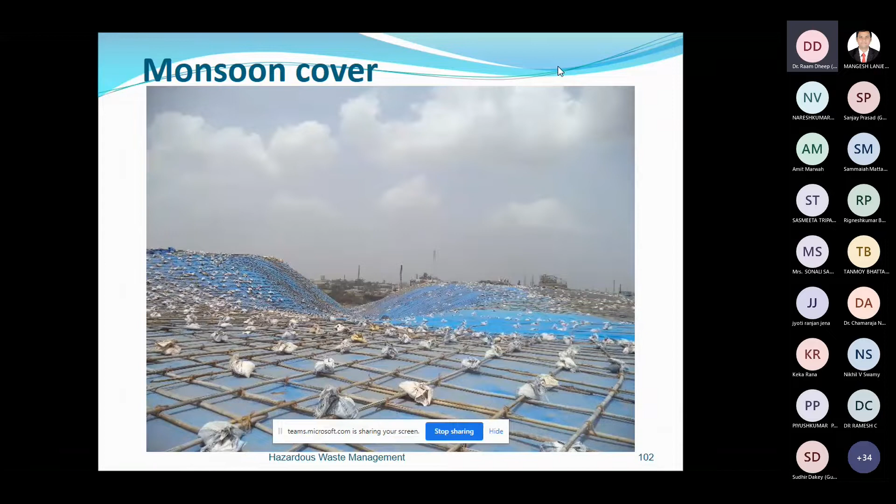Insurances are there, like public liability insurance, special contingency insurance, and an escrow fund, which is operated by the Bank, Pollution Control Board, and BEIL. So that tomorrow, somebody should not run away. Even if somebody runs away, there is a fund to take care of the rectification activities.

This is a common incinerator guideline. Accordingly, we have prepared this incinerator project. Each incinerator has 6.5 million kilocalories per hour capacity, and capacity is about 2.5 metric ton per hour. Two numbers are there. Various types of waste can be fed to this one.

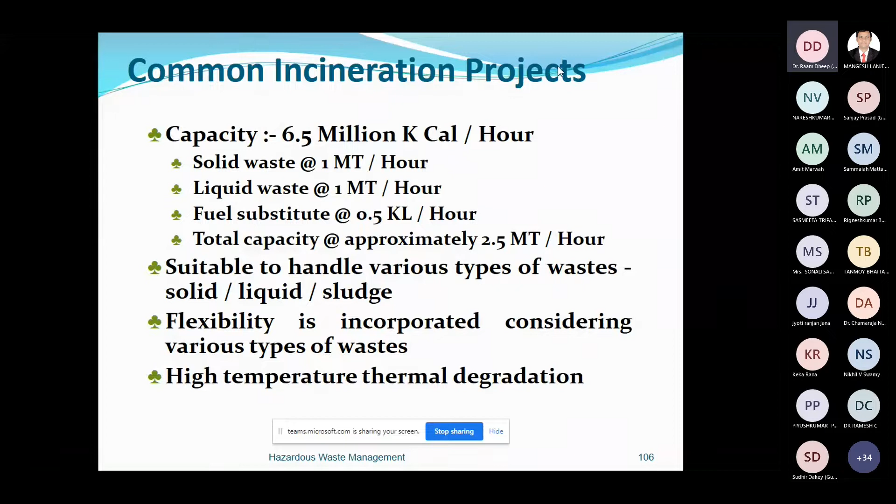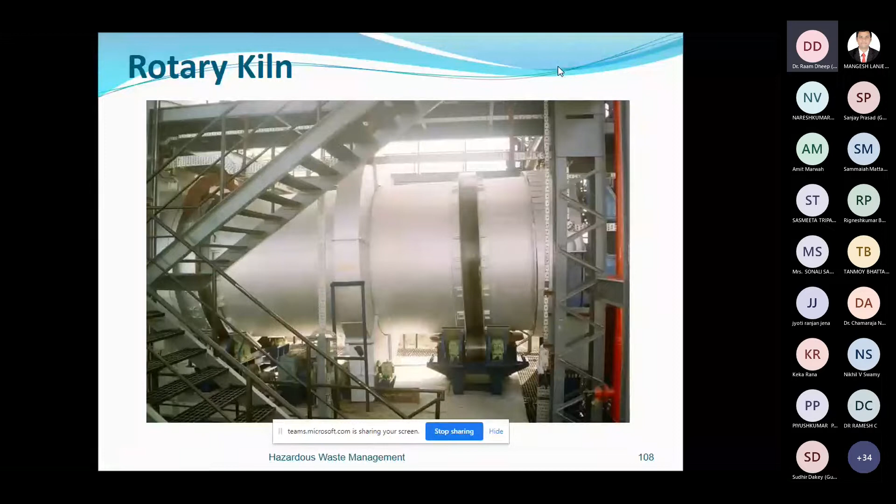Rotary kiln, it's just like a cement kiln, 8-meter length and 3-meter dia. It's refractory lined inside. So this is the primary chamber, first stage. Second stage is the post-combustion chamber, which is a tall cylindrical vessel designed to give 2 seconds gas residence time.

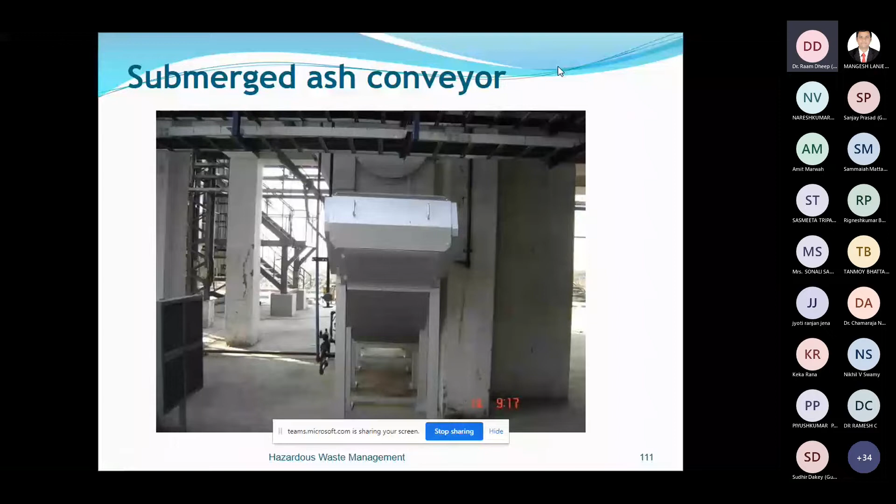Dioxin monitoring was done in the initial stage itself in 2005, and every year we do it at least 2 times. The requirement is once in a year. We do at least 2 times, and always these results are within limit. This is the second common incineration system installed after the first one. The first one was done somewhere in 2005. The second one was in 2012.

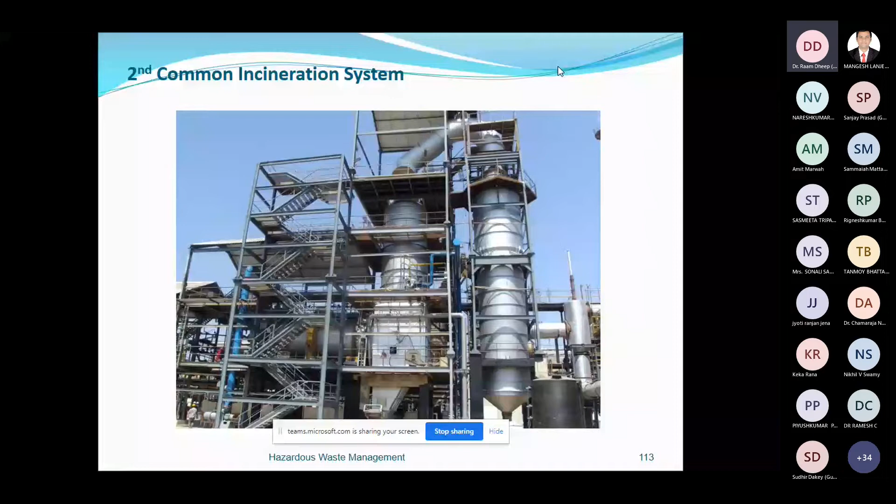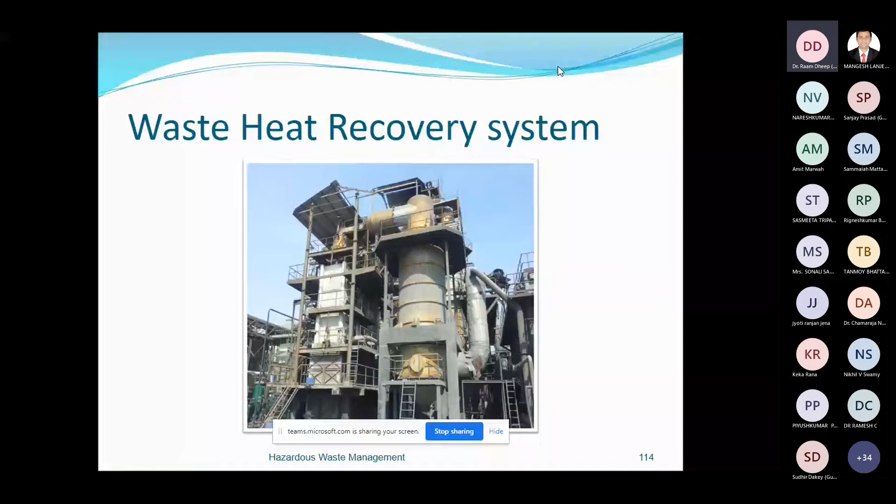Then a waste heat recovery system was incorporated along with the second one. So after the 1100 degrees centigrade at the second stage, the gas heat is there. So you recover it using waste heat recovery, and you generate steam. The steam we use in the multiple effect evaporator. In the 3-stage multiple effect evaporator, leachate and other high TDS effluent is treated.

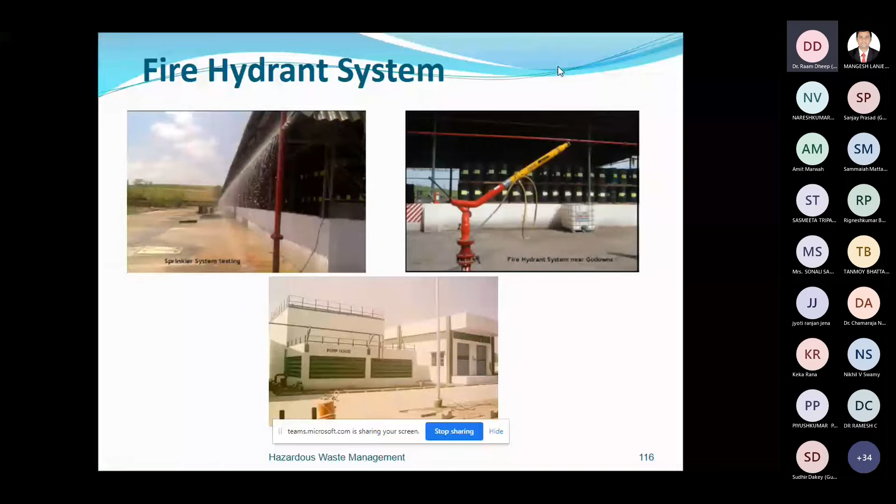We also have a plastic processing plant where we collect the plastic waste from our waste and then convert it into granules after cleaning and everything. About 75 ton per month we can make, and there is also a separate e-waste processing facility.

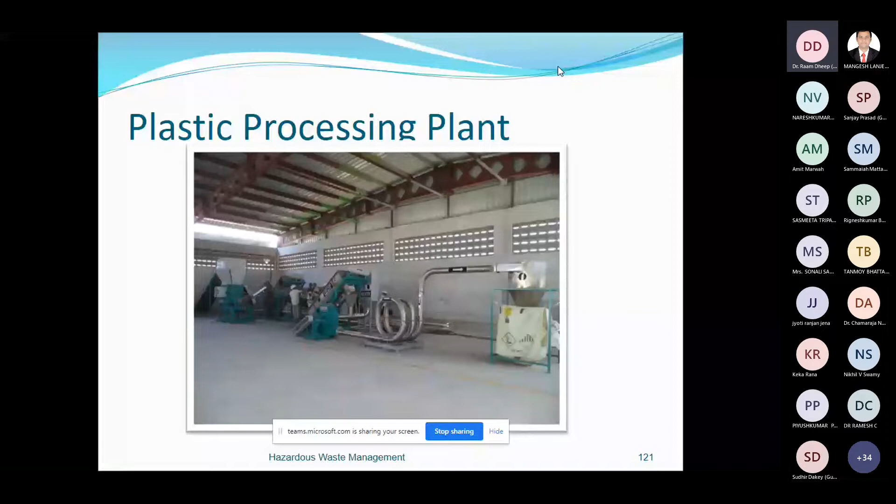And today also a lot of efforts are there, and BEIL is setting up a facility at Dahej also, a big capacity incinerator. It's almost ready for the trial runs. Hazardous waste is a big problem, and these issues are being solved by operating such facilities.

Another example I have given is a facility we are operating at Baddi Nalagarh, Himachal Pradesh. You can see the greenery surrounding our facility and the aerial view of our site. That green inside is the pitched area. That is the capped area.

Totally environment friendly, because a very difficult environmental problem is converted into an environmentally safe facility. So this is the challenge our team and BEIL have taken up, and they are doing one facility at Himachal Pradesh and another at Kerala, KEIL. So these are being operated. A very tough problem made into a very simple task.

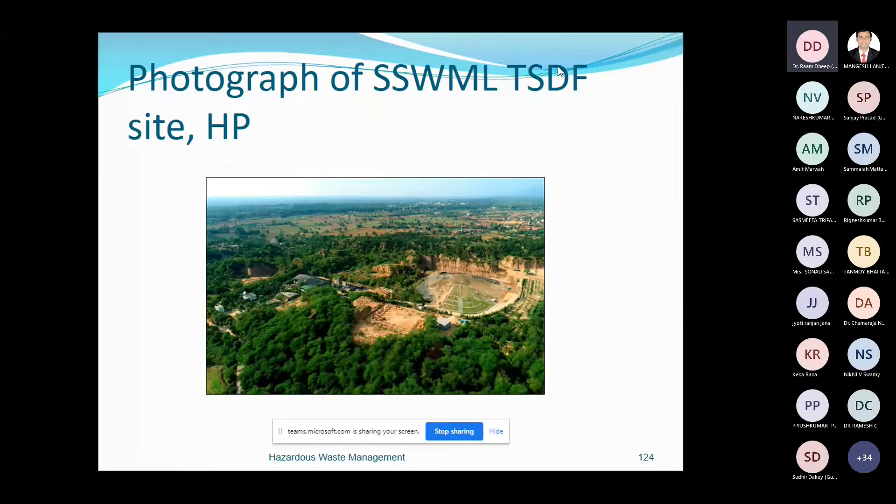So thank you. I think I have completed in the time. If you have any questions or suggestions, we can discuss. Hello? Yes, thank you, sir. Can I close my presentation? Yes, sir. Kindly ask the questions. If you have any queries or any doubts, you can share. Hello.

Sir, in the beginning, you told about the Love Canal incident. Can you describe in brief what actually happened in that incident? No, that slide, because there are 3-4 incidents. Love Canal incident, I think what happened, there are the

Hooker Chemicals. I think Hooker Chemicals buried a large number of chemical waste drums in the Love Canal area. That caused the contamination. A lot of studies have been done. Then the people were evacuated from there, and later remediation was done. You can get the detail if you go to the website. You get the history, the total case study, including videos. Okay, sir.